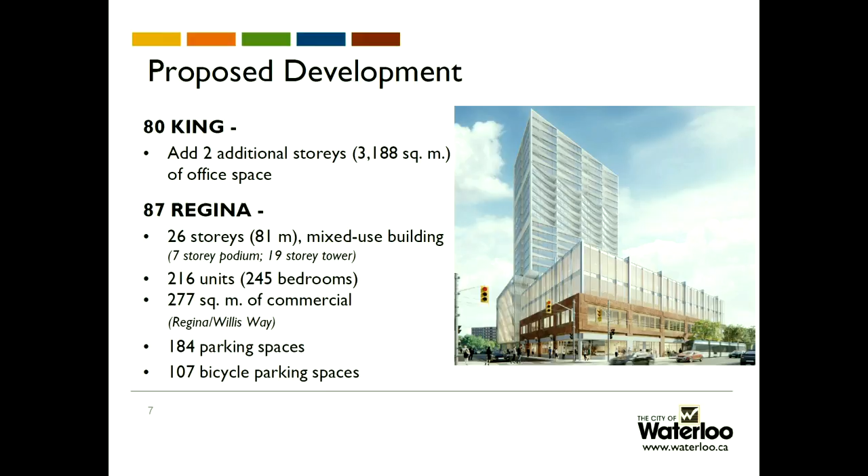In terms of height and density, the proposed height of the development aligns with the height provisions noted on Schedule B1 of the official plan. The building at 80 King Street would be a maximum of 16 meters, consistent with the Main Street designation, and the proposed development at 87 Regina would be a maximum of 81 meters, consistent with the high density designation.

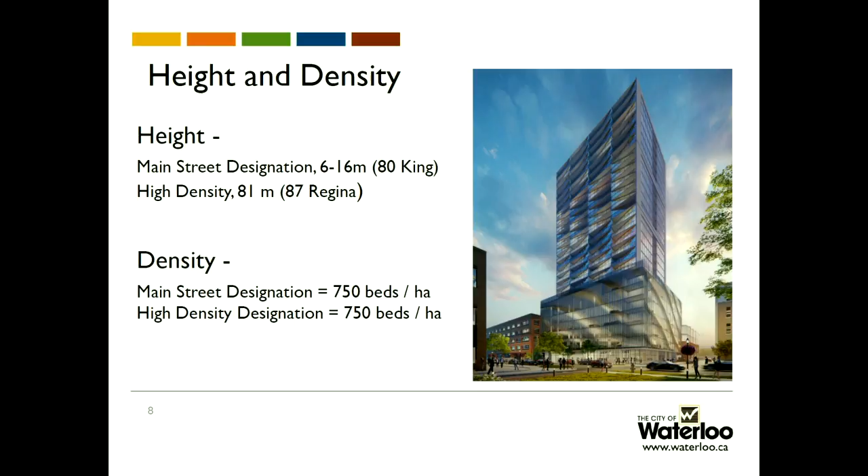The official plan also provides for consideration of sharing density where a property has split designations. Policy 1.4 states that permitted residential densities may be transferred across a land use designation boundary, provided that the property is developed under a single parcel of land under the same ownership, and that all provisions of the individual designation and implementing zoning are met.

The site is different in this regard because there are two properties physically separated by a public laneway, that being Hughes Lane, rather than one single parcel.

Staff reviewed this and are of the opinion that the development does meet the intent of the official plan in this regard, because the lands are held under the same ownership. They do function together and have for some time, with the parking at 87 Regina providing for the tenants of 80 King. They will continue to serve that function in a similar manner with shared parking between the two parcels, and they will be physically connected by an elevated pedestrian bridge.

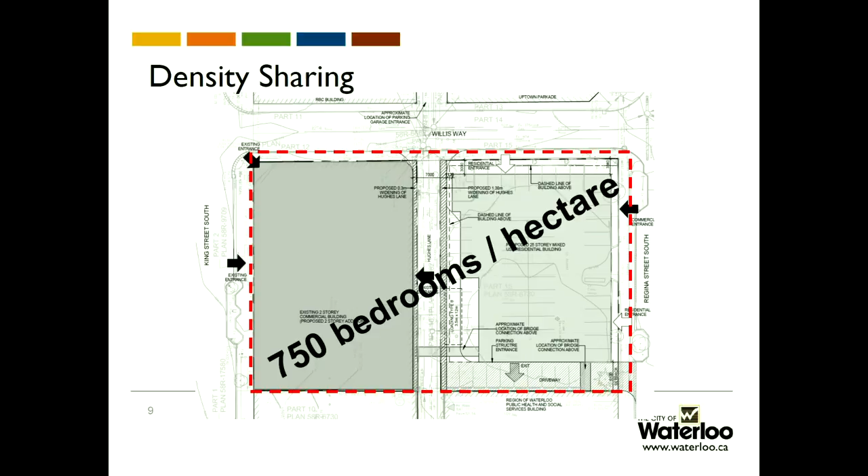However, because the policy framework within the official plan specifically speaks to a shared parcel — that being one parcel — staff determined that an official plan amendment was required to allow for the sharing of density between the two parcels.

In meeting this requirement, the GRCA requires the applicant to provide one being a safe access route, and the other being an emergency plan that would provide for evacuation measures and would address how the residents and occupants would vacate the building and what those protocols would look like.

MTE consultants on behalf of the owner have determined that the nearest point of safe access would be achieved along William Street, immediately west of Hughes Lane, in the vicinity of Marble's restaurant. A safe access route was prepared and submitted for review.

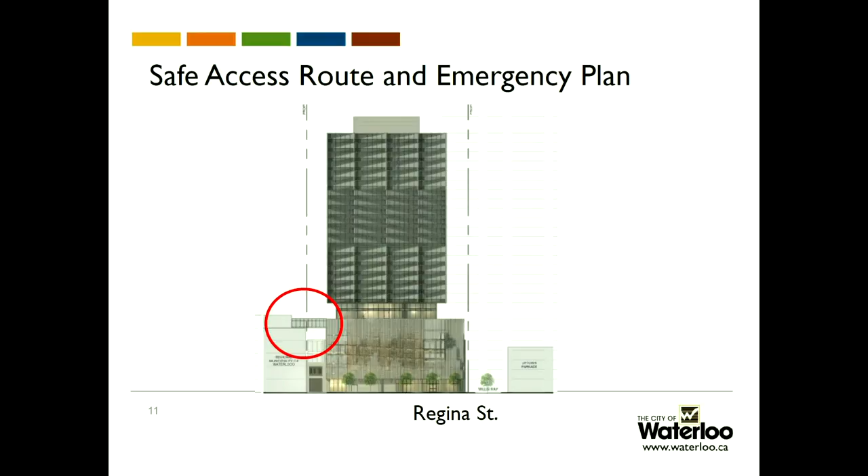In this proposed access, the residents of 87 Regina Street would evacuate the building through an elevated pedestrian bridge that takes them into the Regions building at 99 Regina. They would make their way through interior corridors within that building towards the south end of the property. At that point, a new stairwell would have to be constructed within the landscaped area between Hughes Lane and the Regions parking garage entrance facing onto William Street.

At ground level, the residents would then cross a 1.2 meter wide raised pedestrian walkway across Hughes Lane, and the walkway would continue on to William Street. As part of the access route, Hughes Lane would need to be regraded, and the applicant has demonstrated that turning movements can be maintained with this regrading. However, there may be aspects such as possible tripping hazards that would need to be addressed.

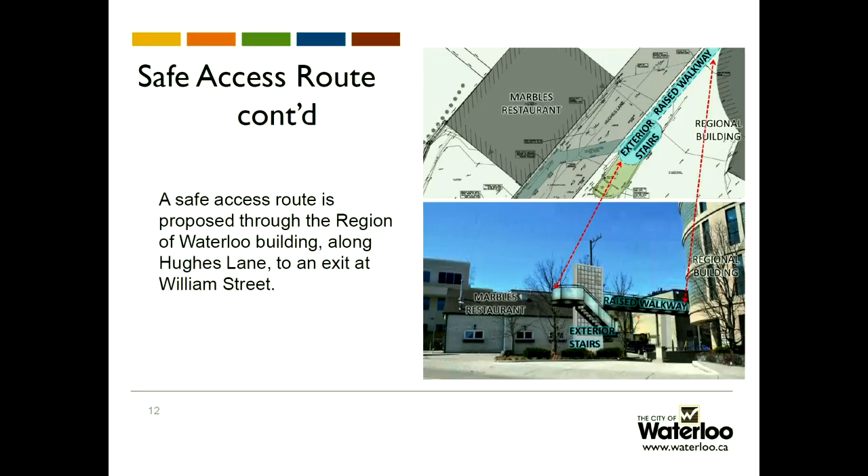Staff are suggesting in this case that a holding provision be applied in the implementing bylaw to address the safe access in greater detail at a detailed design stage. While the applicant has entered into an agreement with the Region of Waterloo to provide for the construction and maintenance of this particular safe access, there still remain a number of outstanding issues.

A substantive issue was identified by the city's Building Standards Division, where two exits are required at all times, including during a flood event, in accordance with the building code, whereas in this case the applicant has only provided one. This is irrespective of the type of land use being proposed. The applicant needs to identify and secure a safe access route in order to provide that construction to the satisfaction of the GRCA as well as the city's Building Standards Division.

There are also a number of technical issues identified in our review, such as the placement of water connections for firefighting, the Siamese connections. Typically where they're placed on the building would be, in this case, under the flood line, so they'd need reconsideration. The location and availability of the building's emergency power supply has to be thought through. Operational designs in terms of the elevators, they'd have to stop at those elevated pedestrian bridges, maintenance of the safe access, and so on.

The third item is that there's an official plan policy that requires development approvals granted on hazardous lands, which these are, that are regulated by the GRCA, to have written permission from the GRCA, and the applicant has not yet secured that from the GRCA.

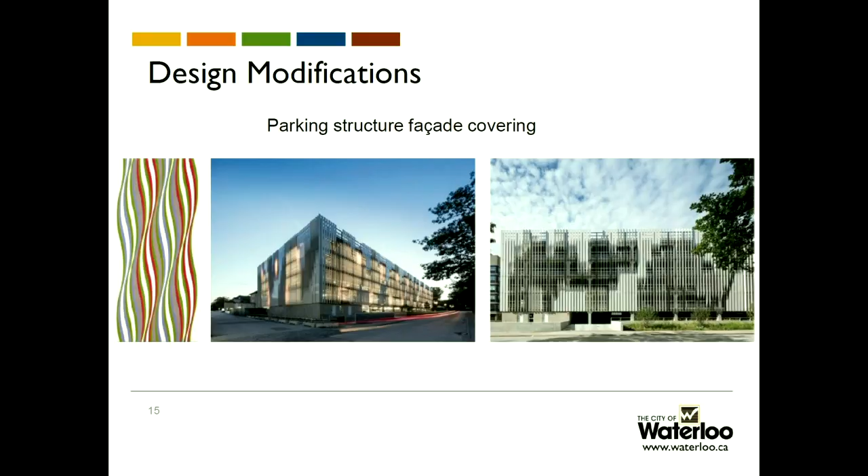That one? Keep going, I know where we are there. I'm almost at the beginning. Oh sorry, you're going the wrong way. Is it that one, or keep going? Keep going, keep going — the one with the pictures. Yeah, keep going, there it is. Okay, where am I here? Well, these are just examples of different facades. Oh okay, so this isn't in Uptown. So this is not, no. Okay, no, okay, because the barriers were worrying me. Yeah, can you talk to me a little bit about — okay, I got it now, I see what you're saying. Excuse me, I'm curious about the pedestrian experience around it and what we've done — need more coffee — what that experience will be for people walking around. That's a high traffic area.

Through you, Mayor Jaworsky, the applicants have provided an activated space at the corner of Regina and Willis Way, with the intention that people are able to be out on the street, whether it's a cafe or a business. The podium itself is meant to mirror or reflect the Regions buildings and the buildings that surround it, without being too overpowering. Between that and wind studies and other elements identified to provide for that enjoyment, it would create a better environment for pedestrians in that area as well.

So it's hard to tell from the, what are they called? The site plans, conceptual site plan. But are there any barriers for people looking into the building or walking past it? If I'm walking up Willis Way towards the public square, what is my experience as a pedestrian? Or is that a better question for...

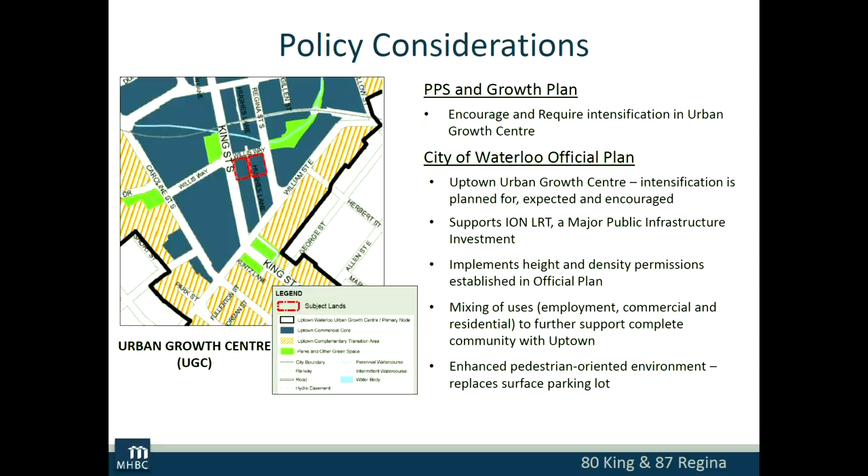This is the best picture, maybe. Through you, Mayor Jaworsky, the entrance for the parking garage will be right here, between the existing regional building and the new building. That side of the building is set back approximately 6 meters from the regional building to allow for a driveway. Folks will go in and then access a ramp and spiral up into the parking structure.

What are your thoughts on hydro line burial, Dan? That's certainly one of the issues we'll be looking at. That ultimately may be the solution to the issue identified by Waterloo North Hydro, regarding the existing above-ground hydro lines. There are a couple of options. It may be that the building can be built without any change to the hydro lines, or if not, one option the developers are considering is whether they'd need to be part of burying those hydro lines. So that's something we're certainly considering, and we'll work through the process with the city.

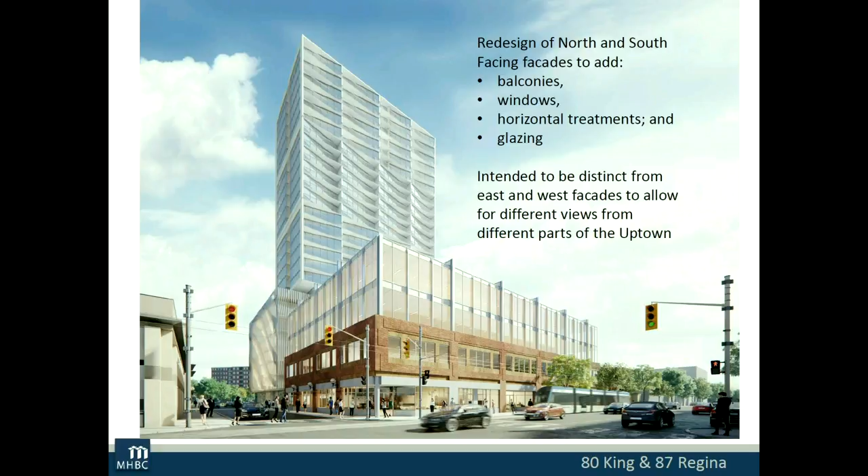Dan, the question I asked Wendy was, what does that 2 extra meters from 14 to 16 meters give you? Through you, Mayor Jaworsky, in summary it gives us the 4th floor on that 80 King Street building. For commercial and office development, the ceiling-to-floor height is more in the order of 4 meters as opposed to residential, which is typically closer to 3. So the 16-meter height limit allows for 2 full commercial floors on top of the existing building. Okay, so that's primarily the difference. Very logical, thank you very much, Dan.

One other comment, if I may. I want to compliment the Torgan Ownership Group - one, for their patience over all those years, and secondly, for having so much faith in Waterloo.

Much appreciated, thank you. I had a couple of questions in your presentation, Dan. You mentioned the region of Waterloo supports the development - what did you actually mean by that? I think you were talking just about the access bridge, correct? I'd say on 2 parts. Certainly the region supports it in the sense that we've done a lot of work with them, and one of the options for safe access is through their building. But also, as part of that, they support the concept of higher density in the urban growth center, which can support the LRT system that's up and coming.

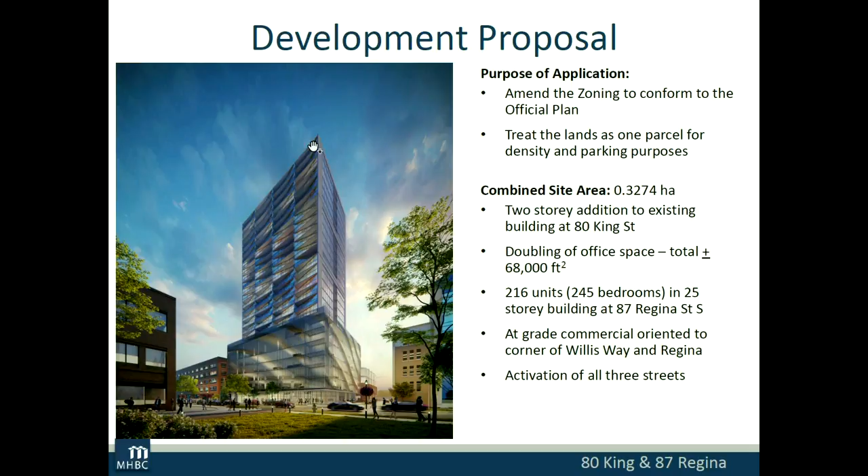And then in the staff report we had here, it mentioned an 81-meter, 26-story building, but in your presentation you said 25-story. Just wondering if there's been a change there. Maybe that's a typo - no, through you... this is actually a question I was going to address in my presentation but forgot. So it's 25 floors. One of the differences - you can see how this looks like it's 6 stories on the parking structure, which was a comment made earlier. It's really only a 5-level parking structure, but because it's a corkscrew design, there's a row of parking on this end, so even though it's 5 and a quarter levels, it ends up resembling 6 stories here. Overall, the height of the building is just less than the 81-meter maximum. Okay, fair enough - I just wondered if something had been clarified there.

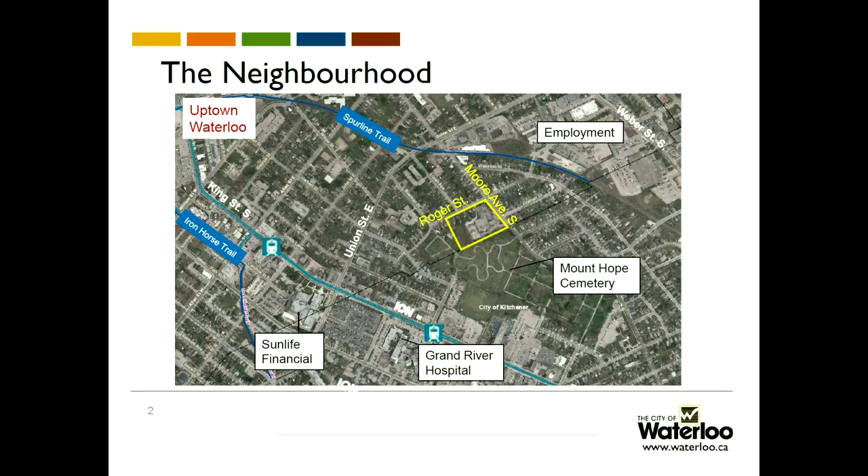There are two trails in the area: the Spurline Trail, with an access point to the north off of Moore Ave, and the Iron Horse Trail, which offers a pedestrian linkage to the west side of Uptown Waterloo and into Waterloo Park. There are bus routes that run along King Street, Union Street and Weber Street, and the Ion, which runs along King Street, with the closest stop at the Grand River Hospital, about 350 meters away.

The lands consist of 8 municipal properties, shown here, collectively approximately 2 hectares in size. The property has about 158 meters of street frontage on Roger Street and about 131 meters of street frontage on Moore.

As you can see by this aerial shot, this is the context of the neighborhood. The surrounding lands predominantly contain single detached dwellings constructed in about the 1940s and 50s, with a few apartment buildings located in the vicinity on Lucan Ave, Union Street, Mary Street, and King Street.

In terms of how the lands currently exist, of the total area, approximately 1.5 hectares is occupied by the Ontario Dye Company, and the remaining lands are used by single detached dwellings and 1 triplex fronting onto Roger Street. There's an informal path that currently exists where the red arrow is at the bottom of the screen, and it leads into the cemetery and provides for access to King Street.

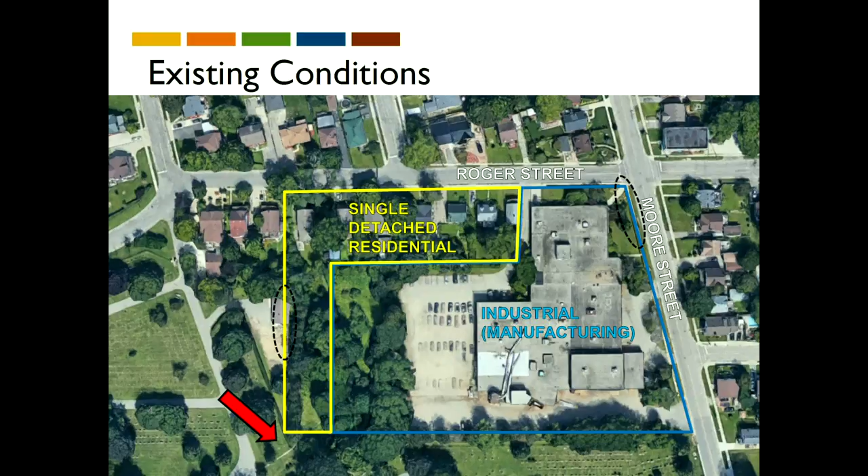The lands generally slope downward from the highest point, close to the northeast corner of the property, which is the dashed circle, to the lowest point, along the westerly property line closer to the southwest corner.

The official plan currently designates these lands as low-density residential on Schedule A and low-density on Schedule B1, which permits a mixture of low-density building forms, including singles and semis, duplexes and triplexes, townhouses, as well as terrace dwellings. The maximum permitted density is 150 bedrooms per hectare, and the maximum height is 10 meters.

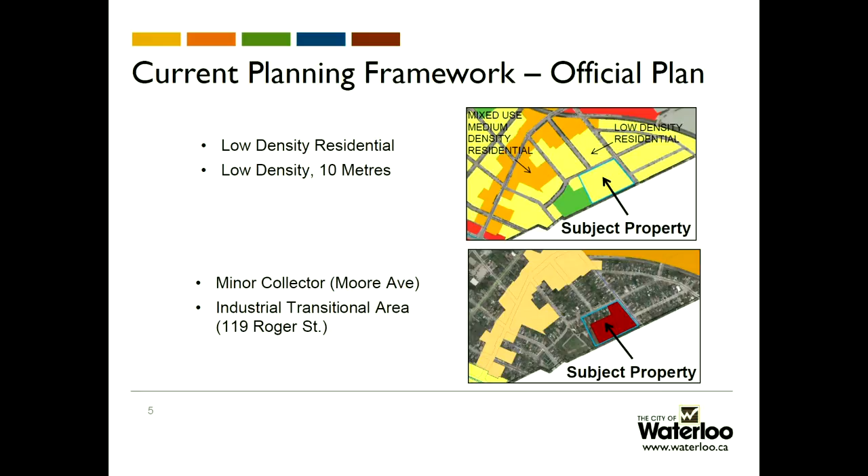Moore Ave is also designated as a minor collector on Schedule B, and 119 Roger Street is designated as an industrial transitional area, and the corresponding policies in the official plan recognize that this area may transition into something else beyond the industrial, more so to residential and higher densities.

In terms of the existing zoning framework, 93 to 111 Roger Street is zoned General Residence 1, which provides for singles, duplexes, and semi-detached dwellings. The maximum permitted height is 10.5 meters, and there is a front yard setback requirement of 7.5 meters where no buildings or structures shall be permitted within that front yard.

119 Roger Street is zoned Industrial 1 for industrial purposes.

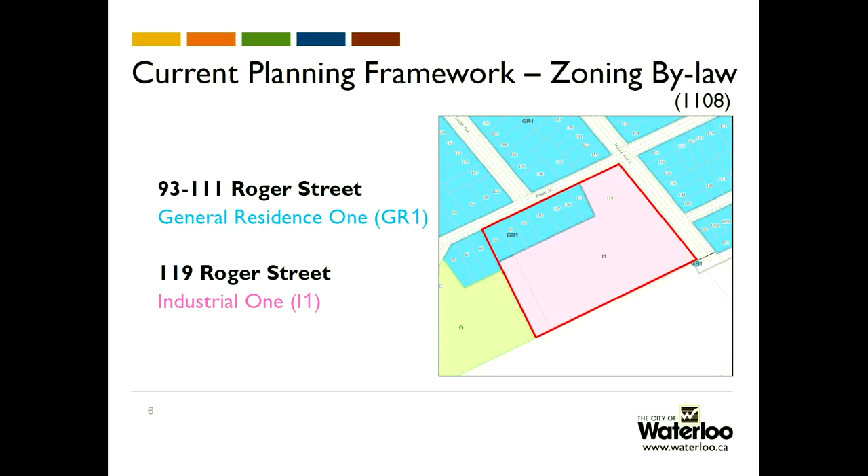The applicant is requesting to amend the official plan in order to redesignate the lands from low-density residential to mixed-use medium-density residential. In considering that, the up-designation will require the provision of community benefits, as well as adding a site-specific provision to recognize a maximum density of 250 bedrooms per hectare, which on this property would equate to approximately 500 bedrooms.

The maximum height for terrace dwellings or stacked townhouses would be 11 meters, and the maximum height for the apartment buildings would be 20 meters.

The applicant is also requesting to amend the zoning by rezoning to holding multiple residence 6, and the holding symbol would require the applicant to complete a record of site condition prior to issuance of any building permit.

The applicant is also proposing through this application to establish some site-specific provisions, including adding terrace dwellings or stacked townhouses as a permitted use, establishing the density of 250 bedrooms per hectare, establishing a maximum height of 11 meters within 35 meters of both Roger Street and Moore Ave, and reducing the parking requirements from 1 space, required in the GR1 zone, to 0.95 spaces per unit.

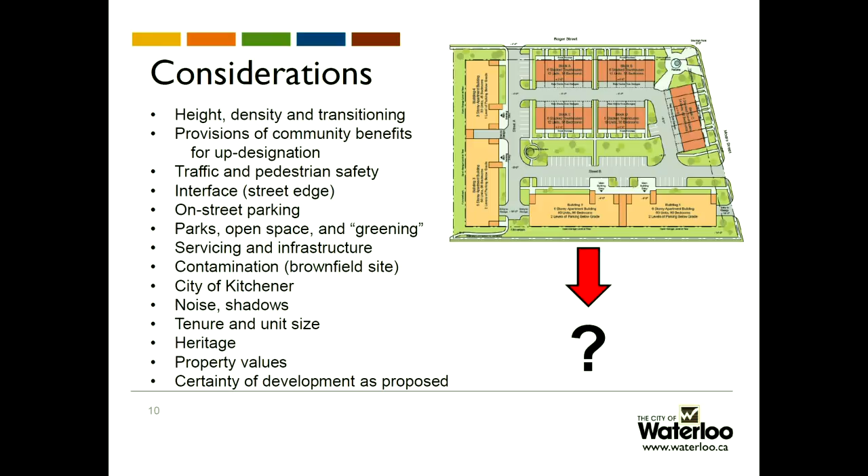There were also noise concerns with respect to more people being brought to the property, as well as from the mechanical equipment associated with the development; whether the units could be sold or rented, and a preference for units containing more bedrooms; the heritage value of the Ontario Dye Company building and the houses on Roger Street; possible impacts on property values; and a concern that there would be a disconnect between the concept plans and the final product constructed.

Two final concept plans were provided by the applicant in May. Both concept plans contain a mix of stacked townhouses as well as apartment buildings. The apartments would again provide that maximum height of 20 meters.

The apartments have been pulled back away from the streets, more toward the westerly property line as well as along the southerly property line. The stacked towns now fully line both Roger Street and Moore Ave, with a maximum height of 11 meters. The driveways were moved to align with the existing road network, and the applicant is providing 8 on-street parking spaces for a portion of the Roger Street frontage.

But there were a few differences between the 2 concepts, namely based on the number of units proposed, the number of parking spaces, as well as the park locations.

Concept A contains 242 units, or approximately 421 bedrooms. That would consist of 168 apartment units and 74 townhouse units. There would be 234 parking spaces, at surface as well as one level under each of the apartment buildings. It also proposes a mid-block park fronting onto Roger Street, which is staff's preferred location.

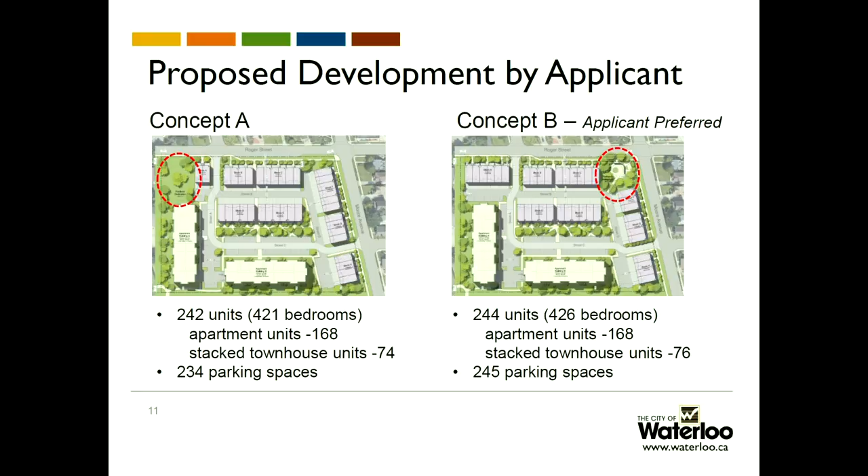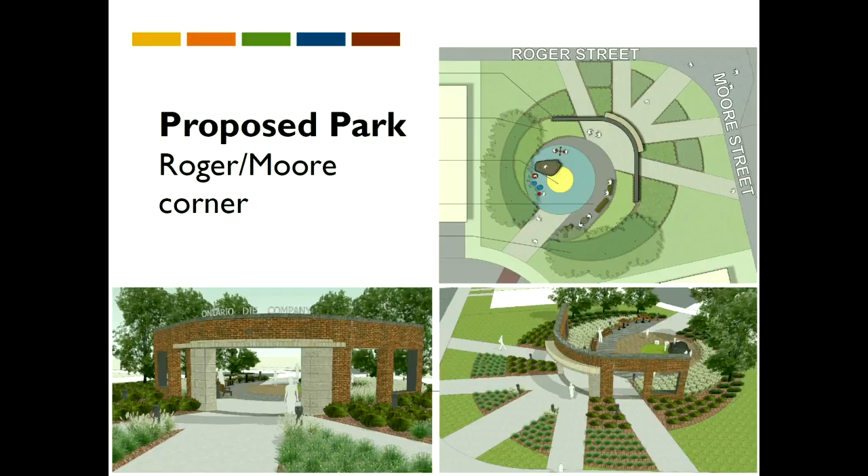These are renderings prepared by the applicant of the proposed corner park. While staff appreciate the design of incorporating the Ontario Die facade or wall, there were a number of practical issues identified by city staff, namely the architectural integrity of the wall, which would be unknown to us if we were to assume the lands, the costs incurred by the city for its long-term maintenance, as well as higher general maintenance costs associated with the elaborate planting and walkways, the clearing of walkways.

While we reviewed these concepts, there were still 2 policy requirements that in our minds hadn't been sufficiently addressed. There is a policy within our official plan that states that when you're considering the up designation, among other things, community benefits need to be provided that will help offset any impacts that might be realized by that increase in density. The other is that the appropriate height and density transitioning at the interface where the existing neighborhood meets up with the proposed development. These 2 policy considerations affect the parkland and the setbacks.

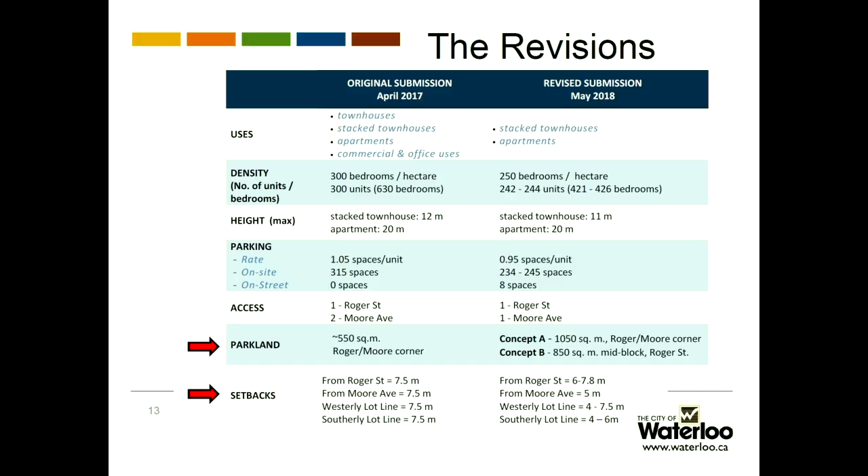In response to these outstanding matters, staff is proposing a 3rd concept, or Concept C. It consists of a park that's mid-block, located on Roger Street, approximately 27 by 39 meters, as well as a 500 square meter amenity area at the corner of Roger Street and Moore Ave, again to include a portion of the ODC facade. The setbacks along Roger Street are larger than what's proposed by the applicant, and we've added an additional landscape buffer. The projections and encroachments have been decreased by comparison to what has been offered by the applicant.

In staff's mind, the benefits of that mid-block park are that it provides safer access for younger children, away from that busier intersection. You've got an area that would provide a large opportunity for programming. It creates an opportunity for the city to establish a north-south pedestrian connection through to the southwest corner. It also provides a physical separation between the existing dwellings on Roger Street and the new stacked townhouses or block that's closest, and effectively reduces the massing of those blocks as you move from west to east. You can see you've got a block of 2, then a block of 4, then a block of 6, providing that better transition.

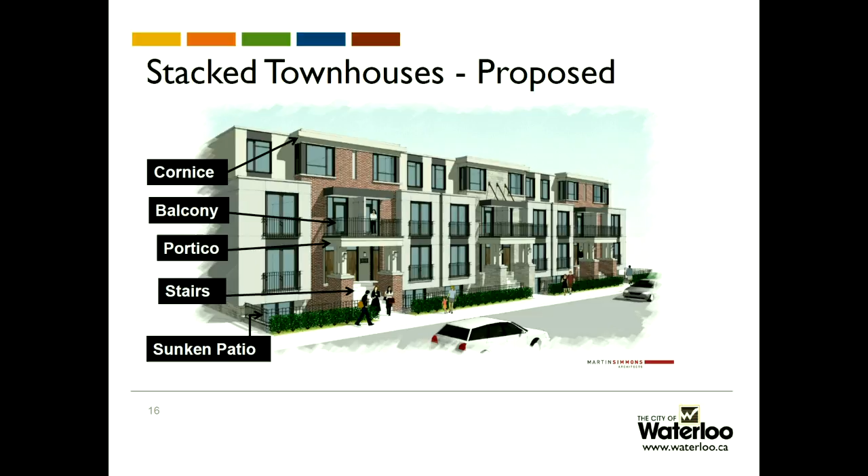And although not identified, we'd also be expecting the stairs to encroach into that front yard as well.

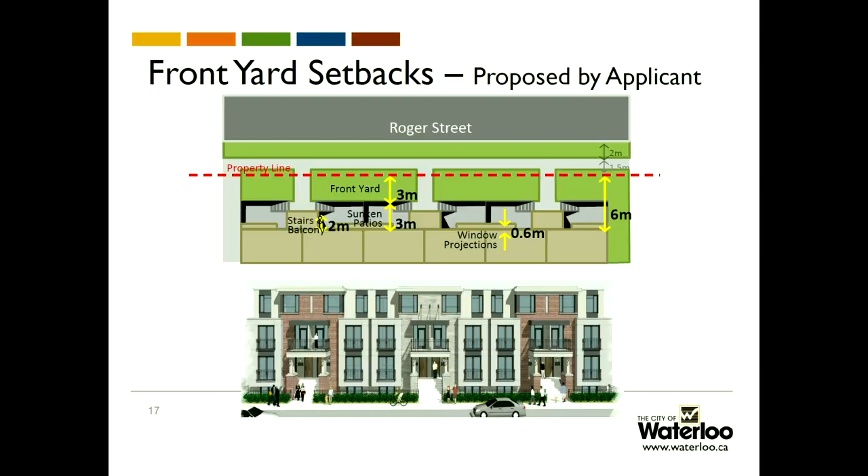This slide illustrates the collective results of those encroachments and projections on a chunk of Roger Street that I've used to illustrate this. The sunken patios would extend into the front yard by 3 meters, leaving only a grassy front yard of 3 meters. In staff's opinion, this streetscape is very limiting in terms of the tree species that can be planted within that 3 meter buffer, and it also reduces the usable area for the front yard, which is not really in keeping with the neighborhood, which has that 7.5 meter setback.

In comparison, staff are recommending a 7 meter street line setback from Roger Street that would include a 5-meter buffer, as shown here. There would be no projections permitted within that landscape buffer.

The sunken patios would be reduced from 3 meters down to 2 meters. Although we are recommending a 2-meter sunken patio, there is the ability for the developer to continue maintaining that 3-meter sunken patio. It would just mean that the units fronting onto Roger Street would have to be pulled back by an additional meter.

The overall intent of all these regulations is really to create a streetscape that more closely aligns with the neighborhood and provides for a larger area for tree growth, as well as a small private area for the owners to have and use.

Similarly, staff recognize the fact that Moore Ave is a different road than Roger Street. It does have a larger right-of-way and boulevards. On that basis, we are supportive of the applicant's request for a 5-meter street line with a 3-meter landscape buffer.

In terms of staff recommendations, we are proposing to support a maximum density of 250 bedrooms per hectare, and a minimum of 50% of those units to contain at least 2 bedrooms. Terrace and townhouse dwellings are to be permitted. We have added the townhouse dwellings just to provide greater flexibility within the zoning.

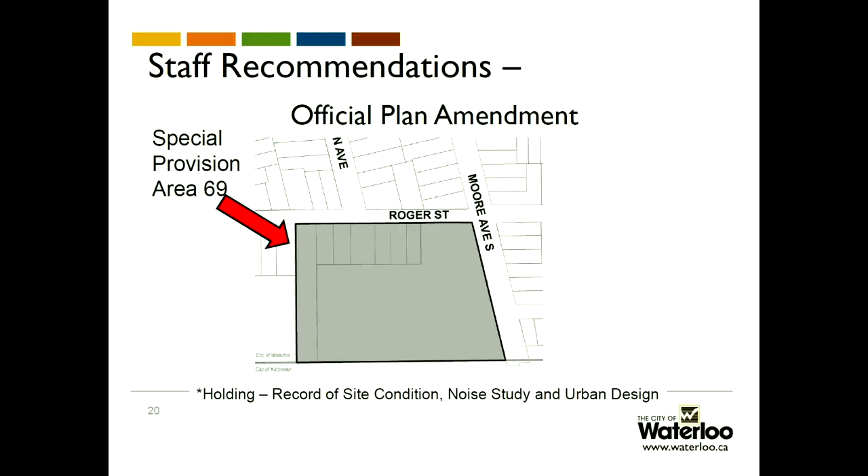As well, we'd be proposing to create a special provision area. The holding provisions within that special provision area would be applied for a record of site condition, as well as a detailed noise study, and demonstrating that the proposed development is consistent with the city's urban design guidelines and site-specific directives contained within the staff report.

In terms of the recommended zoning provisions, we'd be looking at setbacks from Roger Street of 7 meters, from Moore of 5 meters, a southerly lot line of 6 meters with exception to 35 meters of Moore Ave, which we'd be looking at 5 meters, a westerly lot line of 7.5 meters, and from any areas zoned Green 2, we'd be looking at a...

1.8 meter setback and a 5 meter setback from the apartment building. And then from any private roads, again, a 1.8 meter setback. The landscape buffer is 5 meters along Roger Street, 3 meters along Moore Ave.

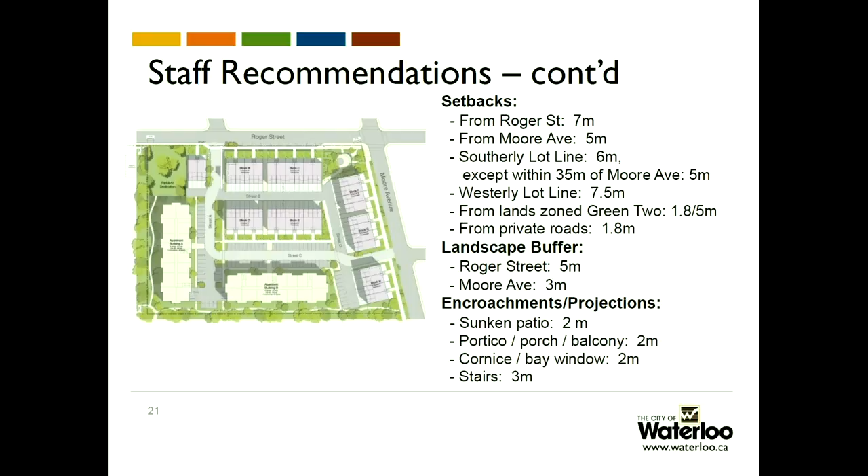And then, again, the encroachments were ranging 2 meters for the sunken patios and porticos and cornice or bay windows, and then 3 meters for the stairs. In terms of parking, we are proposing the residential rate of 0.85 spaces per dwelling unit with the additional 0.1 spaces per dwelling unit for visitors and 0.6 spaces per dwelling unit for bicycles.

In closing, I'd like to just thank the residents who did participate on the neighborhood working group. They did provide their time and very thoughtful comments, which were very much appreciated through the review of the plans and reports. Thank you.

That little park where the signage will go, the manufacturing Ontario Die area, so that will be a public area, so the public are allowed to use it, but it's maintained and owned by the developer, correct? Through you, Mayor Jaworsky, yes, we would be proposing that it would be publicly accessible, so the public would be able to use the space, but it would be privately owned.

So the private owner would be in charge of maintenance? Correct. Okay. And because of the nature of that land, where what it was, who will be paying for any site cleanup that probably would have to be done? Would that be citizens or the developer? In terms of site cleanup, do you mean the use of the land and all that? From a contamination perspective, yes.

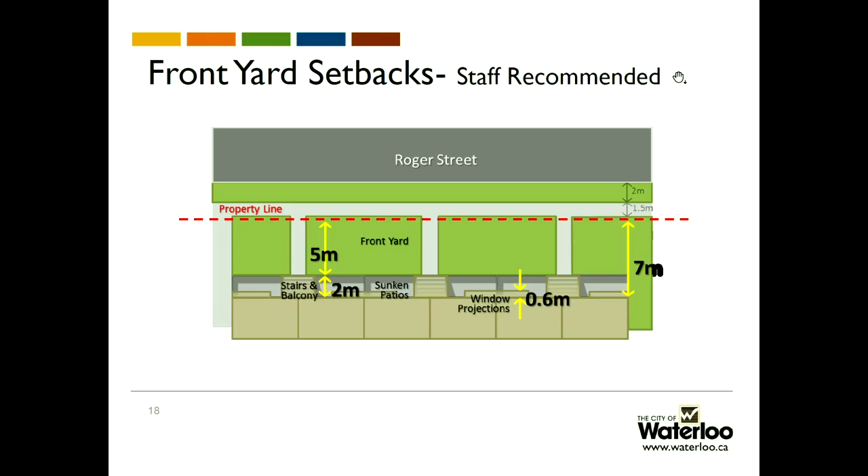Okay. And another concern that had come up from neighbors was, this is a very family-oriented area, it's 8 to 80s in that neighborhood, and the idea that whoever's moving in here, they'd like to see some families. So there was the idea that there should be larger 3-bedroom, 2-bedroom, 1-bedroom units, but skewing to the 3-bedroom, and that's what it looks like in the report. So can you tell me a little more about that?

Through you, Mayor Jaworsky, yes, there is the requirement we're proposing as part of the site-specific zoning regulations that at least 50% of the units contain at least 2 bedrooms or more. Within any of the concepts proposed, there are a number of 1, 2, and 3 bedrooms. The 1 and 2 bedrooms are primarily in the apartment buildings, and the 2 and 3 bedrooms are in the townhouses. So each of the stacked townhouses, the bottom unit will be a 2-bedroom, and the top unit will be a 3-bedroom, so you're getting about 34 3-bedrooms and 34 2-bedrooms in the stacked towns.

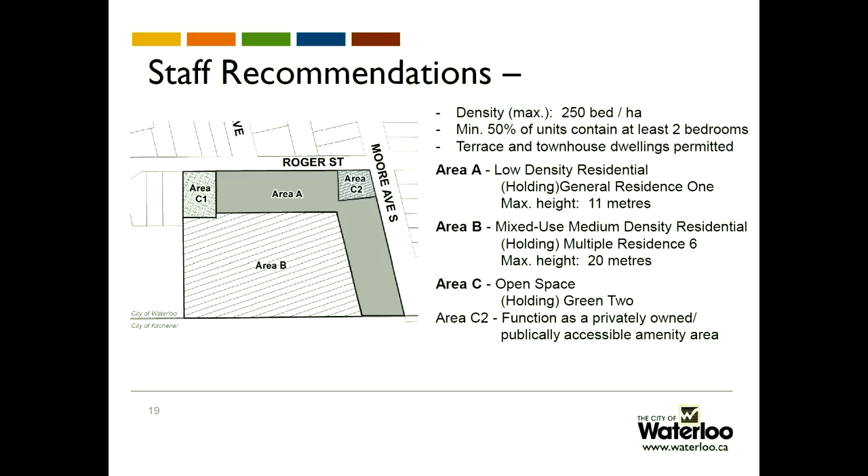You talked a bit about the Roger Street setback issue. Is anything predominantly different on Moore, like with the walkout patios and things like that? Is there an issue on Moore Street? We talked a lot about Roger, but I don't remember a lot about Moore and setbacks there.

To you, Mayor Jaworsky: we do make a distinction between the different roads of Roger Street and Moore. Roger is an undersized right-of-way comparatively to Moore. Moore is a minor collector, intended to move traffic through neighborhoods. Because it's a wider right-of-way, it has boulevards—you see the sidewalks, and then on the other side of the sidewalk is that boulevard, providing greater separation and opportunities for tree plantings. So for those reasons, we see it as a different streetscape than Roger Street.

Gotcha, okay, thank you. Further questions of staff? Seeing none, thank you, Wendy.

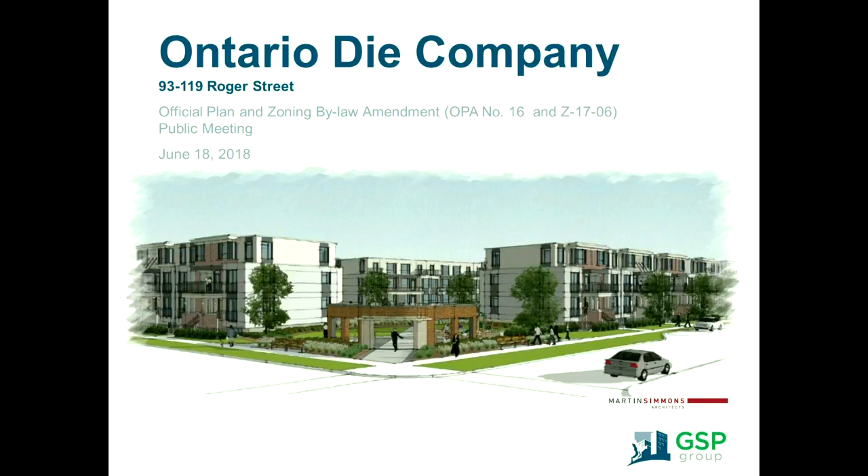So we're here tonight to support the staff recommendations to redesignate and rezone the site. However, we're going to ask for your consideration on a couple of matters, specifically the park and a couple of setbacks, as we move through the presentation. We have graphics and plans that have been updated over the past couple of days, so they are different than what is in the staff presentation. If you'll indulge me for 10 minutes, we'll walk through that and review it.

Certainly, as Wendy indicated, we started this process over a year ago, and the ODC site is certainly unique—an industrial operation in a residential neighborhood dating back to the 1940s. It's been there all those years, and now it's time. ODC is moving to a new facility in the north end of Waterloo, and it's time for this site to transition to a residential use.

We had the informal public meeting here in these chambers, followed up, as Wendy indicated, by a neighborhood meeting that was well attended in August. We had a number of working group meetings and ongoing discussions with city staff. Because we're on the border with the City of Kitchener, we also had discussions with Kitchener staff, and they reviewed all the technical reports. So there's certainly been a lot of discussion and work that has gone into the project.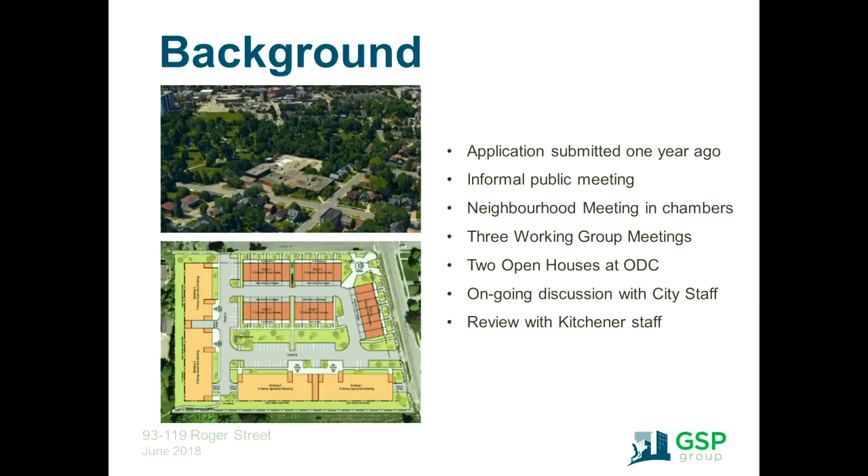I echo Wendy's sentiment that we had some good sessions with the neighborhood—maybe didn't agree on everything, but we worked through it, discussed all the items, and at the end of the day we've ended up with a different plan and a better plan. Those revisions I won't go over in length—Wendy has covered them off—but you can see the major ones.

One of the big ones: in the original concept we submitted, we had apartments, the end of which went out to Moore, and here, even though this was only a 3-story apartment, the end went all the way out to Roger Street as well. That's one of the big changes in the plan now—the stacked townhouse units fronting all the way around on Moore and Roger Street, with the apartment buildings set back behind. The overall density has gone down from 300 to 250 bedrooms per hectare.

We've looked at widening the street, as Wendy indicated. Along through here, Roger will be widened, providing the opportunity for new sidewalk and on-street parking. We proposed to widen it along here as well, but the neighbors said they'd like to keep it the way it is and keep some of the trees, so we removed that, and we also removed a proposed widening on Moore.

So the townhouses have decreased in height as well. We had originally asked for 12 meters in height, we're now at 11 meters.

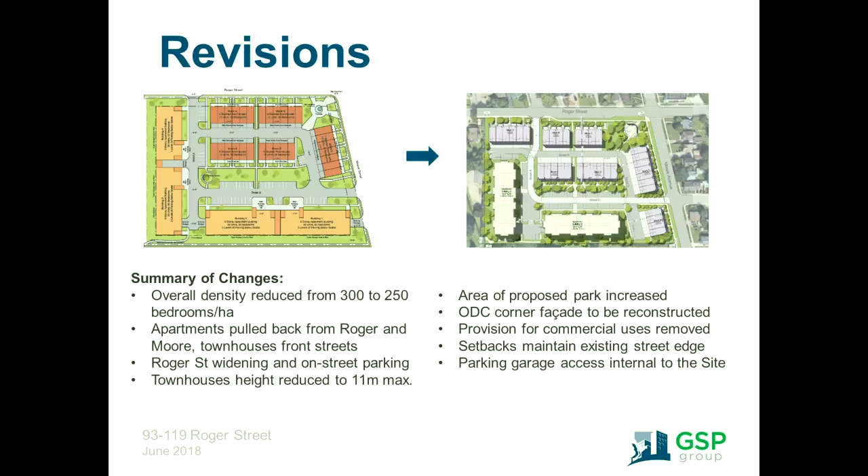The technical studies have also been reviewed by city staff, and so the site is serviceable. The traffic studies have been submitted and reviewed by city staff here and the city of Kitchener as well, since Moore goes across the boundary, and those studies have been reviewed and concurred by the traffic department staff. So from that perspective, we've got a site that is certainly workable.

And this is our current concept plan that we've worked through of late. I think the big thing to note is again the setbacks along Moore and Roger Street, and then also the park at the corner.

So when we originally started, if I go back to that previous plan, we had a park area of about 500 square meters or so. Those two plans, A and B, that we submitted back a month and a half ago, had a park of about 850 square meters. This plan has a park area of about 1,200 square meters, plus or minus, and that's equivalent to the parkland dedication contribution for a project of this scale.

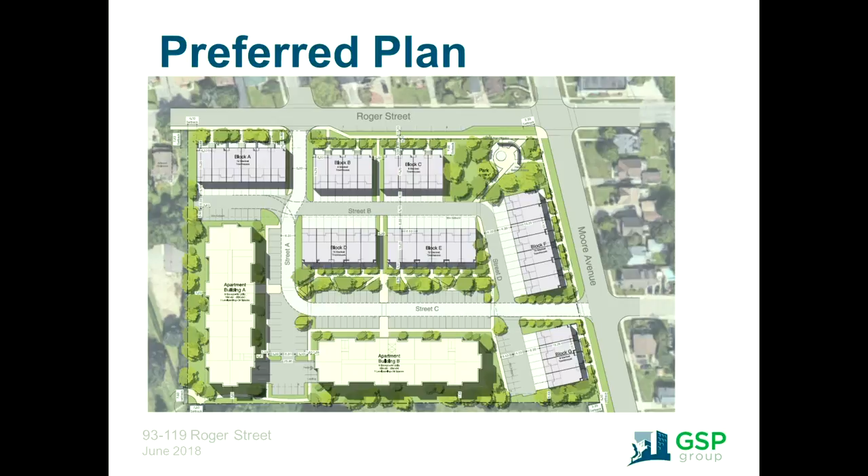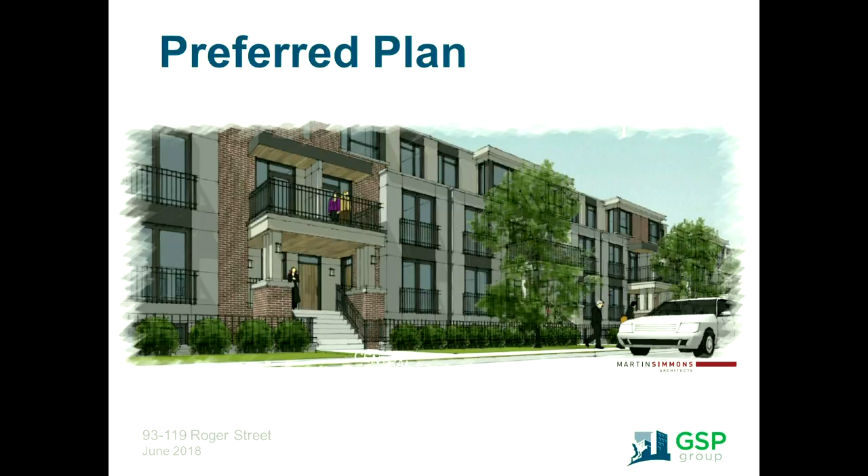Having Reed's involved, they've engaged Martin Simmons Architect to work on their behalf to look at the stacked townhouse units and the apartment units back behind. As you can see, the building elevations are really progressing well - it's a very nice brownstone kind of feel, a very contemporary yet traditional feel.

Emphasis has been placed on not only coming up with a really attractive streetscape, but taking the mass of the building and working through vertical and horizontal projections and bays, and stepping at the top to break up that building mass, to create a very attractive and urban streetscape for the Midtown area.

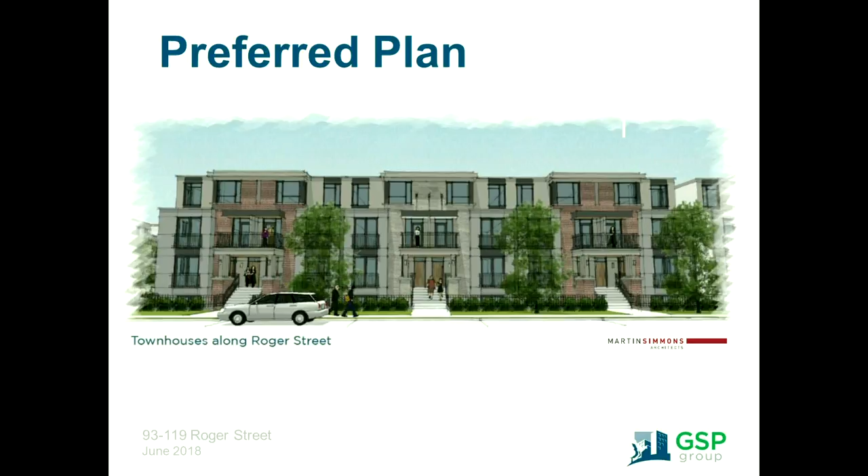So in terms of providing that park or community space, as Wendy's proposal before you in the PowerPoint had the three options - we originally started again at the corner, and staff asked us to look at this option, option A. What would that look like with a park down at the corner? It would be about 1,000 meters or so, a little under what the parkland contribution would be.

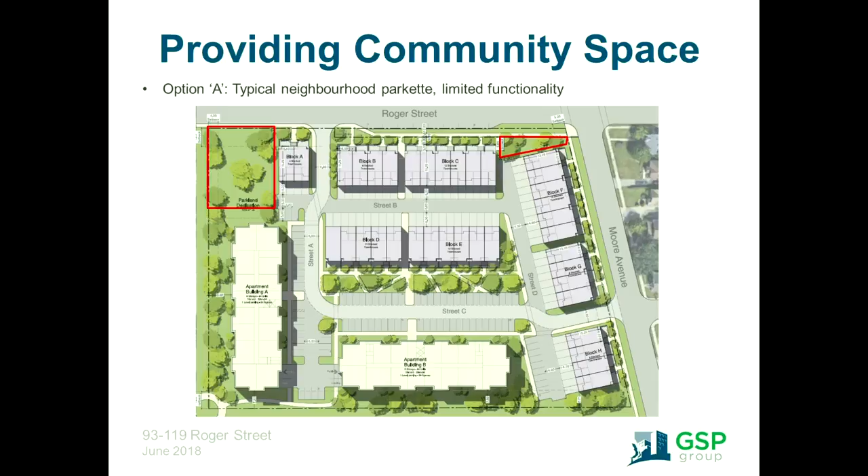It is somewhat constrained, and it does have an overlook from the end of the apartment building there. We're working through the grading on the site right now, but haven't got final grades - the site does fall away as you go from Roger Street back into the site, so it's not ideal from that perspective, but it could certainly be a park option. At the corner, you're left with a very limited amount of space in that option.

Option C was, again, the combination - staff's proposal was to create something in the order of about 500 square meters at the corner, and then the same amount of public park space over on the northwest side. That has the largest amount of space, and certainly it's above and beyond what the parkland dedication would be. In our opinion it's also the least efficient, because you're spreading your efforts between two pieces of property, and if we save the building facade, it gets a little squeezed in that space as well.

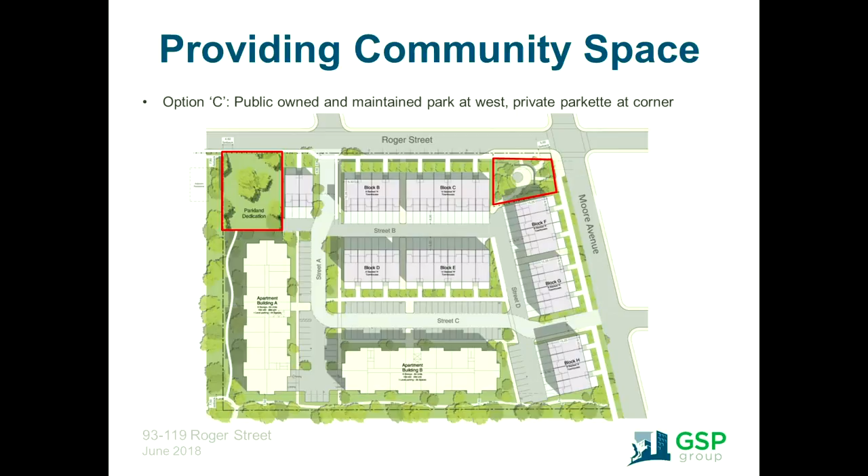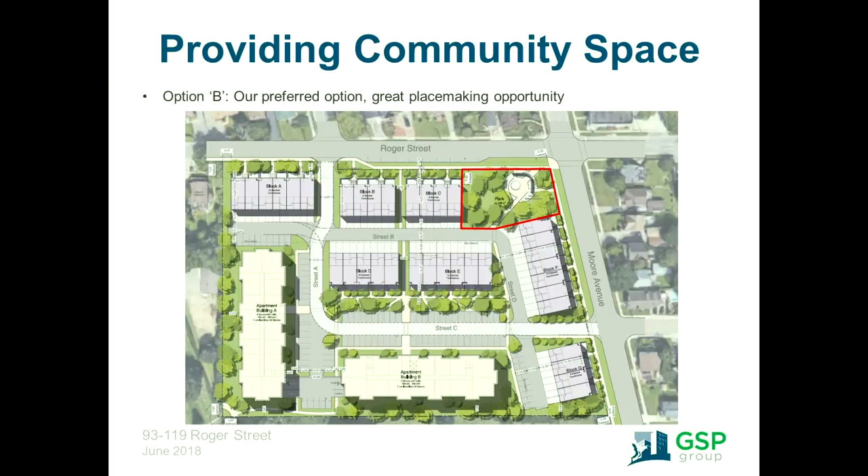So this plan was recently created, and we're looking at enlarging that corner park so that it's about 1,200 square meters in size, combining those two park or public spaces into one that's bigger and, in our opinion, most efficient and effective. We've got about 1,200 meters up from 800 meters, and this is going to be the flattest part of the site along those two streets at the corner, so that gives us the greatest flexibility. We can take the ODC facade and reconstruct that at the corner.

But I think our biggest point here is that we've got enough space that we can create a wonderful multifunctional public space. We've got enough land here that we could do play areas and equipment for kids, sitting areas both back in as well as along the street, gardens, and some hard court areas or small plaza spaces. So we've got a great opportunity here to create something that'll be a real focal point for the community, something that'll be attractive, as Councillor Laurel said, for people 8 to 80 years old.

And what we're proposing to do is create a privately owned, privately constructed, and privately maintained space here, but with public accessibility. So there'd be an easement placed over top of it that would give the public access to this. And that's an approach that the city has used recently, I understand, in the Carriage Crossing neighborhood, where the parks there have been developed on a private basis.

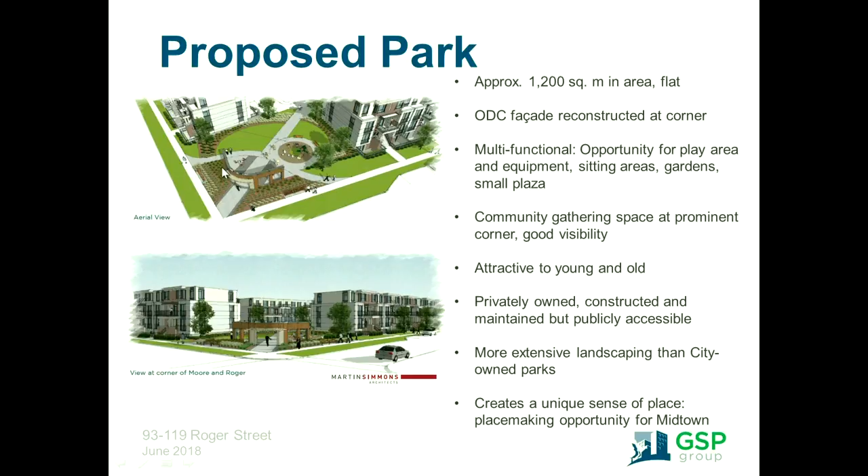We recently had an open house at the ODC offices last week, and there was certainly some support shown by those who left comments for the park. And I think the thing that people liked again was the centrality and the multifunctional nature of what we can do here on this important corner.

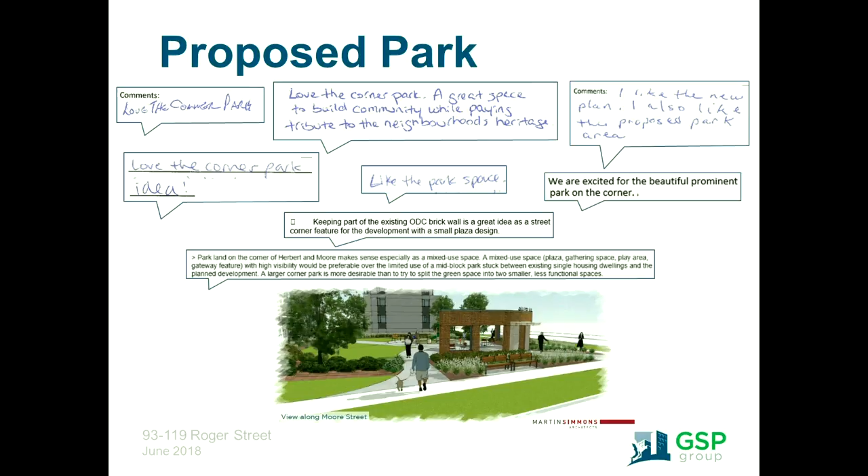And I think the opportunities again, we can do hard court areas, we can throw up a basketball net, areas that can be programmed for other neighborhood functions and festivals and markets and those kind of things. We've got room for kids' play areas, some open lawn area. We can design it so that it can be seasonal as well, maybe look at a rink. We haven't got to that level of detail yet, but those are all possible things that we could do here.

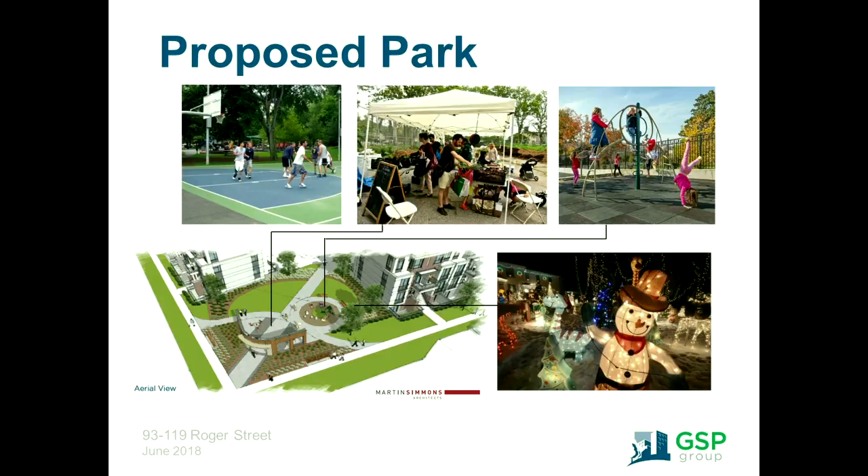In terms of the proposed regulations, we submitted a letter on Friday. We asked for a series of setback adjustments, but we've had some further discussions with staff, and this is going to be an iterative process, perhaps not dissimilar from the previous application you had, where as we go through this process, we're going to have more information and deal with some of the technical issues like grading.

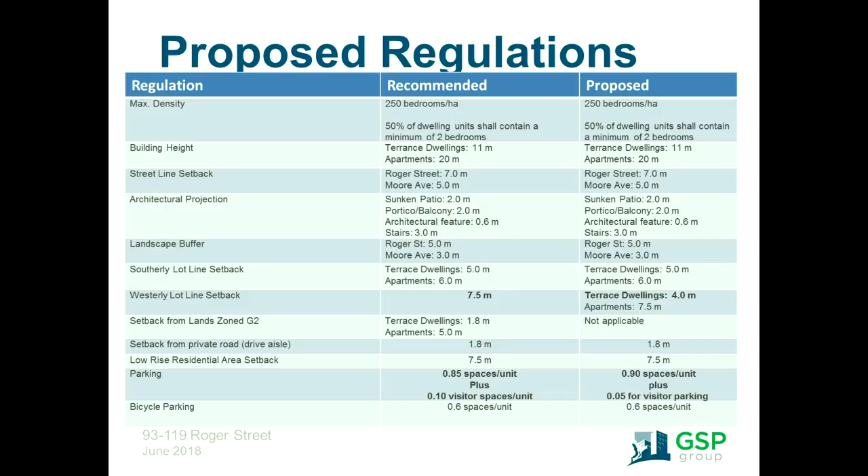So what we are certainly prepared to work with right now are the regulations that are recommended before you. And as we get into the detailed design, I think we have an understanding that if there's some good rationale for making some small adjustments, instead of 2 meters, we may need 2.4. We can work through with staff and make those adjustments as we go forward. So there's really just a slight adjustment to the parking regulation that we want to work with right now.

In terms of streetscapes, we are proposing a 7-meter setback, whether the planting area is 5 meters as recommended or we adjust it a bit. We certainly do have enough planting area to create a very attractive street edge here and have room for some hedge planting along by the courtyards and for some good street tree planting along Roger Street as well.

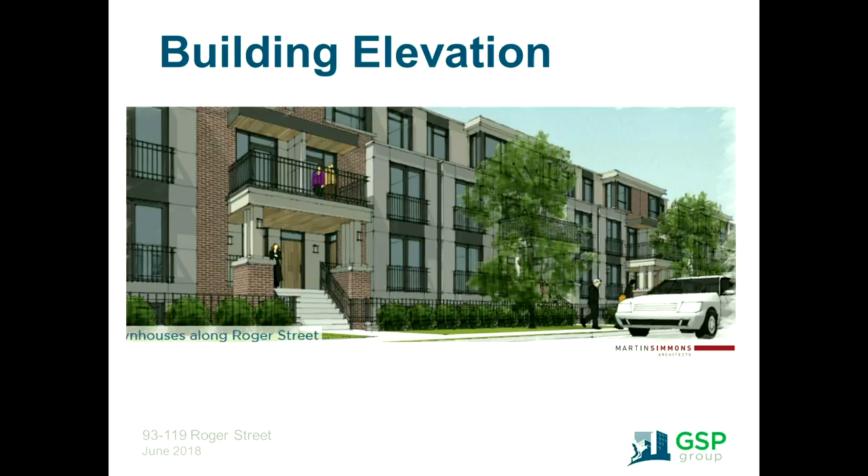The buildings, I think, are really starting to evolve, and in conjunction with that green forecourt and the street tree planting, I think we'll have a very attractive edge to the community. The building, as we've requested, is 11 meters in height, and we think that scale is appropriate and works in the neighborhood. Given the setbacks proposed from the street and on the opposite side, there's quite a separation between units across the street, and we have an appropriate scale that works.

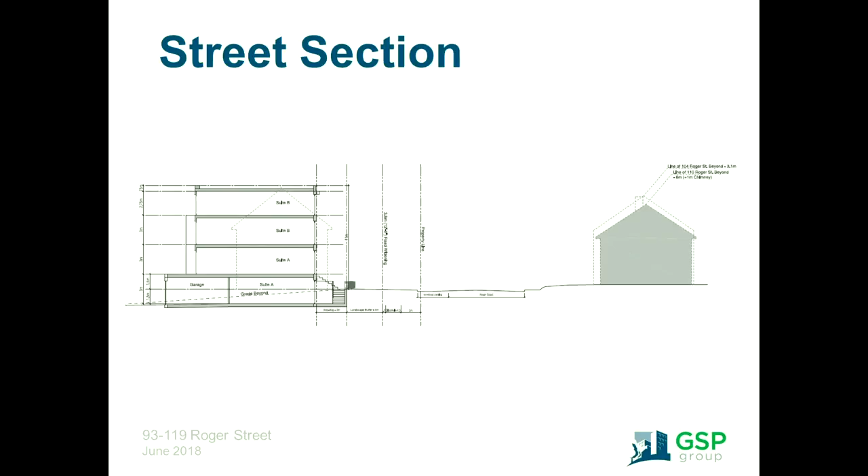Keeping in mind the current official plan policies and zoning regulations on the site do permit buildings up to 10.5 meters in height, so our increase in building height is modest. The apartment buildings as well are at the back. They'll be subject to more detailed design, but the intent is to come up with a building elevation that fits into the community in terms of materiality and design.

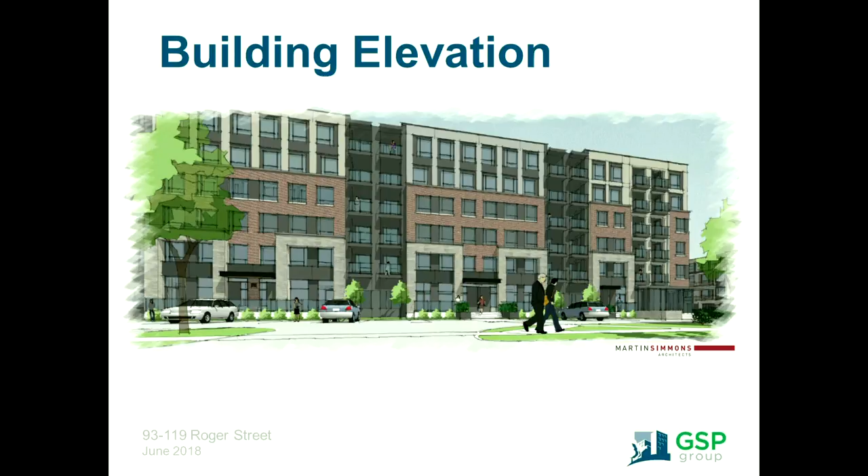In terms of conclusions, this is certainly a unique site, and a unique opportunity for an infill development that is quite close to the LRT station, about 350 meters away. We think this is an appropriate and sensitive redevelopment of a brownfield site. We can provide a range of housing on site, and as was mentioned through the questioning, there will be a significant number of 2- and 3-bedroom units because of the stacked townhouse form.

It was interesting last week at the open house to see a number of seniors come through, asking about the site, the type of units, the size, and when they'd be started. It was clear from talking to them that they were looking for alternatives to their house in the neighborhood. They like the neighborhood and are looking for an opportunity to stay there, downsize, and move into smaller units. So those opportunities would be there as well.

But I think a really unique community benefit here is the provision of family-oriented housing in a central neighborhood, close to uptown, close to downtown Kitchener, and close to the LRT system. If you recall the informal meeting we had a year ago, Professor Don Parker from the University of Waterloo talked about that missing middle in the housing market, and I think there's an opportunity to address that kind of housing here.

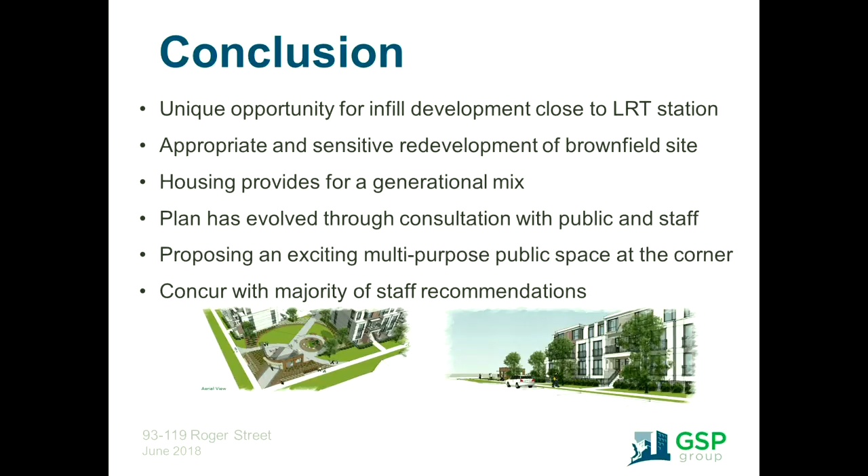So there are these two options for the park system. Our preference is for option B with the parameters that we indicated, and we think that fits with this site and with the unique opportunity that we've got here in this Midtown neighborhood.

In terms of zoning regulations, there was a westerly side yard setback, over in this location here. We were asking for a 4 meter setback, which in conjunction with the existing setback on this property, we think would be a reasonable solution. We've had some further discussions with staff, and if the park goes in the corner location, they'd be looking for a little additional space there, and we're amenable to changing that from 4 meters to 5 meters.

The parking rate is similar to what was suggested by staff or supportable by staff, at 0.95 per unit. We just wanted the amount of visitor space changed so that it's a smaller amount, oriented to the apartment units. Each of these townhouses have a rear garage - that's something I forgot to mention. There will be a rear lane, with a garage and driveway at the back for each of these units. So we're able to take care of the individual townhouse parking back here and create a wonderful streetscape because we don't have to worry about garages and driveways at the front end.

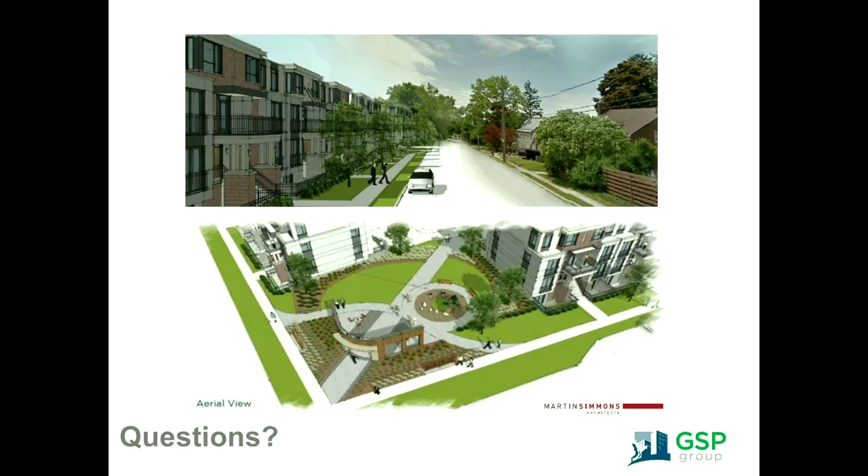But I do like your little clock a lot better than Kitchener's. The Kitchener one is very big, and it's in your face. No, thank you, Glenn. We do have some questions already. Councillor Durrell and Councillor Vieth.

Thank you, Mayor Jaworsky, through you. Thank you, Glenn, for this report. Let's start with this: our staff are recommending something that is not what you're interested in at this point. So what happens if as a council we agree with our staff and not you? What does that mean for this proposal? Well, it means we'll have to sit down and work through that option. If that's the option council prefers, then we'll have to make the best of that. We think this is just a really unique opportunity, and at the end of the day, I think there's more to be gained by doing the corner park.

Okay, and you had brought up traffic, so I'm just going to check my math. At 160 trips over approximately 4 hours, 2 hours in the morning peak and 2 hours in the afternoon peak, we're looking at about 1 extra car a minute. Am I getting this right? I have not got the traffic report with me, I apologize, so I'll take your numbers—if it is 80 over a peak hour, then it would be just over a trip per minute. Okay, so 1 extra car a minute during those 2 peak periods is essentially what we're coming to.

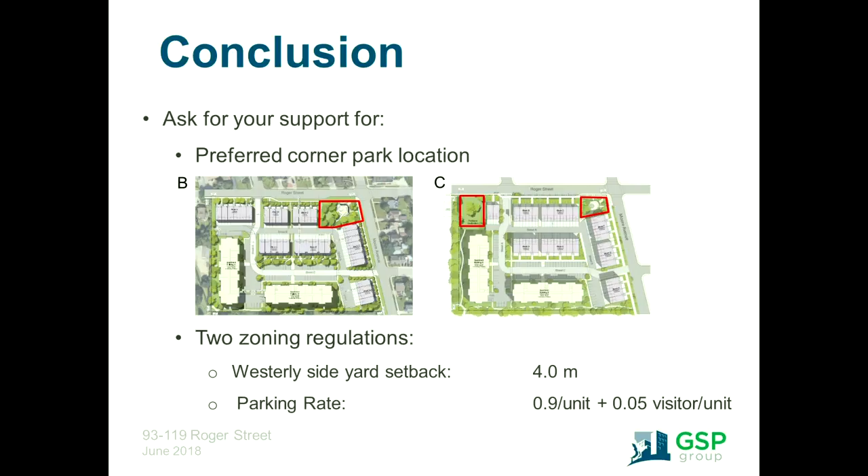So you're losing one less unit with your preferred option. I believe it'll be two because they're stacked units, right? So they're one on top of the other. Oh, okay. Yeah, one module here is 2 units. Yeah, yeah, this makes sense.

Councillor Whaley. It's a question for staff, Mayor. Okay, and any further questions, delegates? Councillor Henry.

So you've talked about the different park options, and given that's the significant point of disagreement between the applicant's planners, yourselves, and staff planners, I think that's useful to spend some time on. From what I heard, your combined park is on the order of about 1,200 square meters. From what I recall of Wendy's presentation, we had sort of about 1,000 square meters. That was about 170, 200 meters deficient.

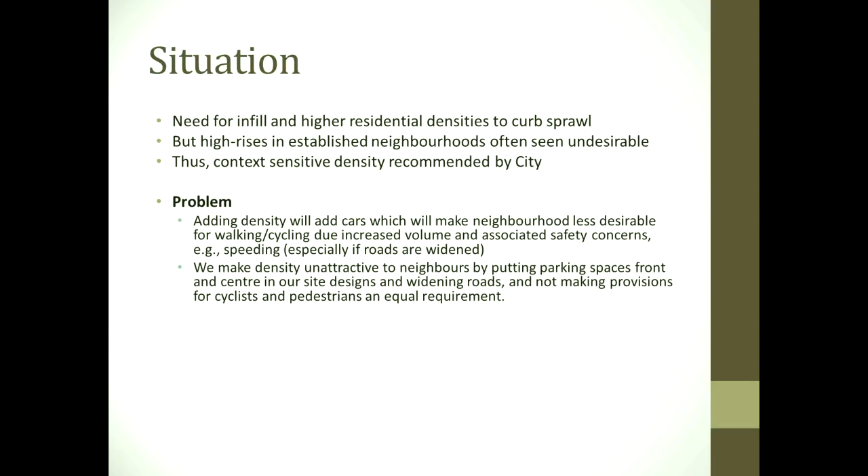So I want to ask these questions and say, well, there's not just these problems, there's solutions. We know how to deal with this. This is not new. Lots of cities, and we've even done it in places in Waterloo. We can make upgrades to infrastructure nearby to encourage cycling and walking. We can think about traffic calming, and we can think about site design that actually creates the kind of density people will enjoy living in, as opposed to just wanting to get in their car and drive away from it.

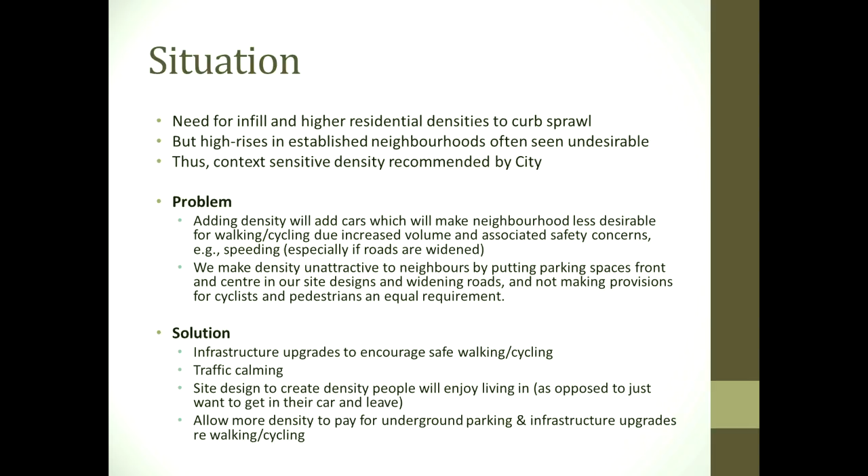We could even allow a bit more density on the site than what is currently being proposed by the developer and the city, and thus help pay for more underground parking and infrastructure upgrades in the surrounding area. Here's one of the proposals we've seen.

I would argue one could add another apartment building in there, but actually turn the in-between spaces into green space if parking was moved underground, allowing residents to actually step outside. Replace the tunnel vision of this development with the facades you just saw from the developer, and imagine that could be an interior courtyard space, not as boxy as this perhaps. It's just meant to give an overall example. But that's what's being built in other places to keep families in higher density locations - interior green space where people can actually spend time, see their kids play, and so forth.

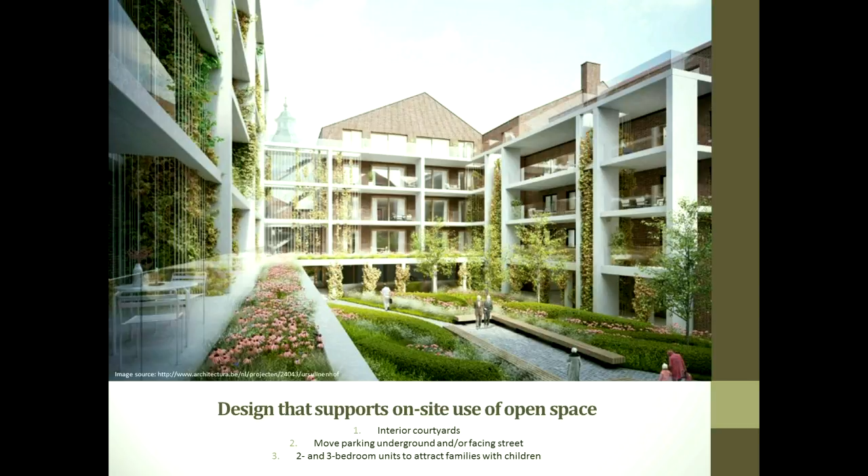But if we're going to say that the reason we want to allow more density in this neighborhood is so that people will use the LRT and connect with active transport to uptown, we should be building the facilities to actually facilitate that, right? Explicit cycling lanes.

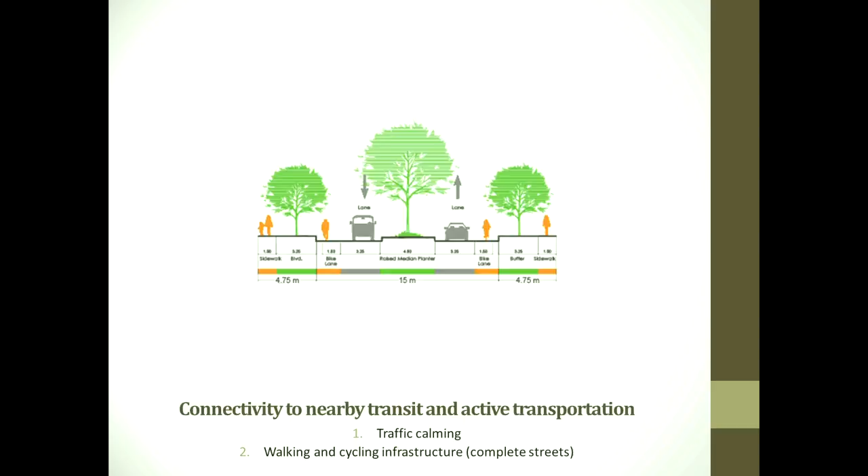What about the path to the LRT? I think that's a great idea. That's going to actually probably be the main connector from that neighborhood by the site to that LRT stop by the Grand River Hospital.

I'd like us to think more about how it will be maintained in the winter. Will it be wide enough to accommodate pedestrians and cyclists? Will there be lighting for nighttime, when people are returning off the LRT and going through parts of the cemetery, and then cutting through, hopefully, what will be a community trail?

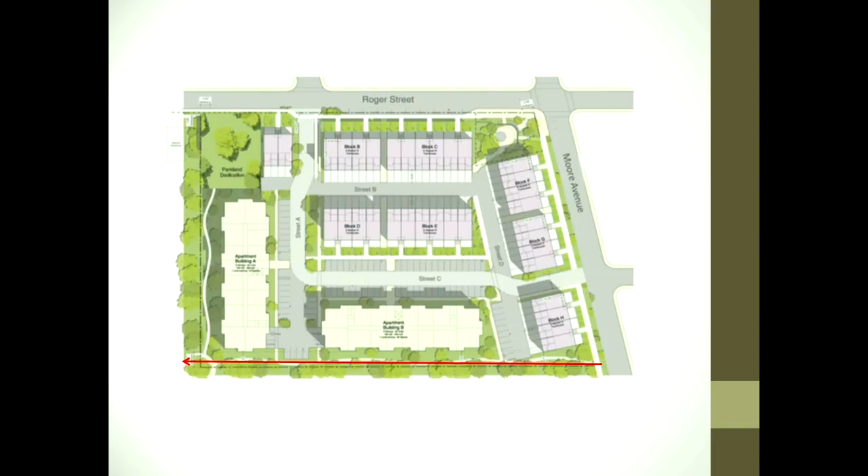Why not at minimum suggest traffic calming in the immediate vicinity of the site to ease the concerns of neighbors about how fast these cars will be going, when many of their kids will be walking to the school just down the road? Yes, we can think about this as a minor collector, but on a day-to-day basis this is a way to school, a way to go to the grocery store, a way to ride your bike to the park, to connect to the spur line where that first arrow ends.

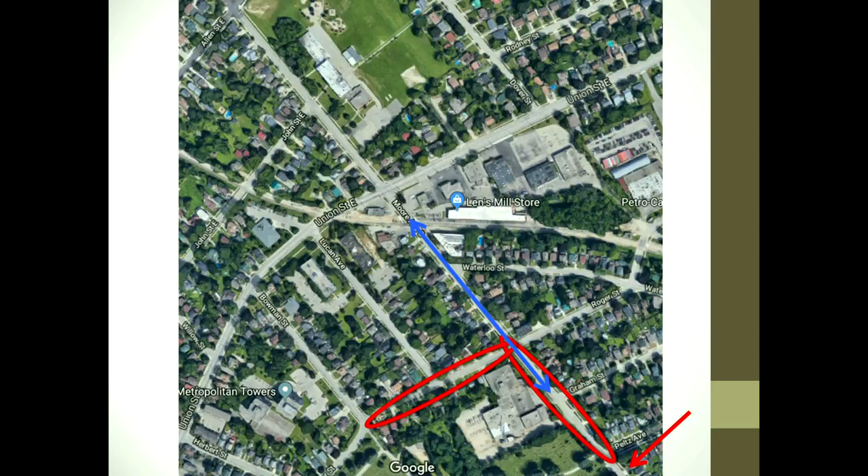So how will we actually use this development as an opportunity for community benefits in this broader sense? I ask you to consider that off-site issues are not considered separate from the new development.

Council could set a standard for what developers need to provide in neighborhoods if they want more density in existing low-density areas. The development is indeed on private property, but impacts of the design have public impact on the surrounding areas. I think Council needs to ask for strong designs that will allow future residents to live active, transit-oriented lifestyles and make their home locally so they don't need to drive to the park or school or just play with their kids outside. And I say that not to be anti-car, but because the LRT and growth management and all these tools are actually being used as the very justification for permitting more density.

So I recommend that Council in some form require traffic calming on Moore and Roger, or Roger and Moore, that's the James Bond intersection as I like to call it, as part of the project to reduce speed on local streets. Council should put forward site design guideline requirements to move most parking underground, to support site design that creates actual usable open space for the future residents.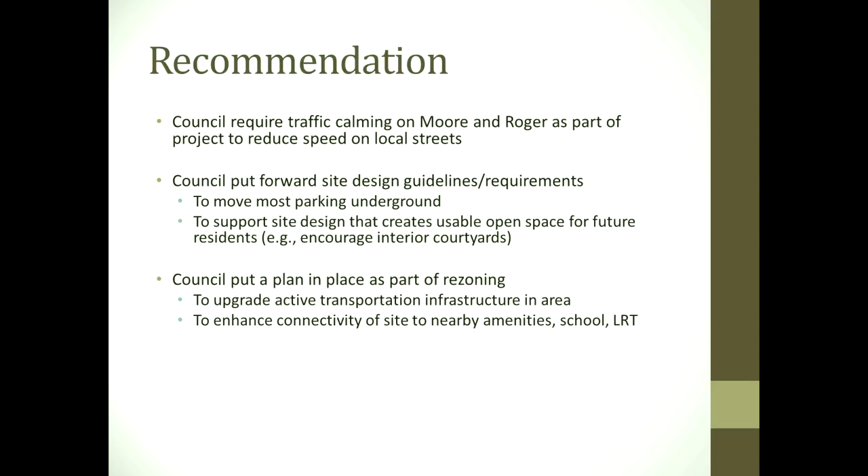For instance, interior courtyards are one option being explored in many places and have a track record for doing that. Council should also put in place a plan as part of the rezoning to upgrade active transportation infrastructure in the area, to enhance connectivity of the site to nearby amenities, school, LRT, because that, again, is the justification for supposedly allowing the density in the first place.

But I also think we can revisit the appropriate density and the design on the site. Medium density is probably appropriate, but my assessment would be that it could probably actually support a bit more density than what I'm currently seeing proposed by the developer and by the city. I'm reminded of what Brent Toderian, former chief planner of the city of Vancouver and now globally known planning consultant, says about density.

He says it's not about density, it's about density done well, right? It's about how you design this density, and I think the developers have come a far way in this case to work with the residents to change the look of the density, but it's also about how the density is situated and contextualized in the neighborhood.

One of my colleagues, Pierre Filion, likes to talk about the tower in the park model, right? You put high-rise — in this case not a high-rise — but you add more density into parks so that people can enjoy them. He says all too often this model turns into density or high-rise tower in the parking lot. What I'm seeing here is not a high-rise tower, but I'm certainly seeing density surrounded by parking. Is that truly in line with the visions put forth by the documents that are being referenced to justify this development? Thank you very much for your time.

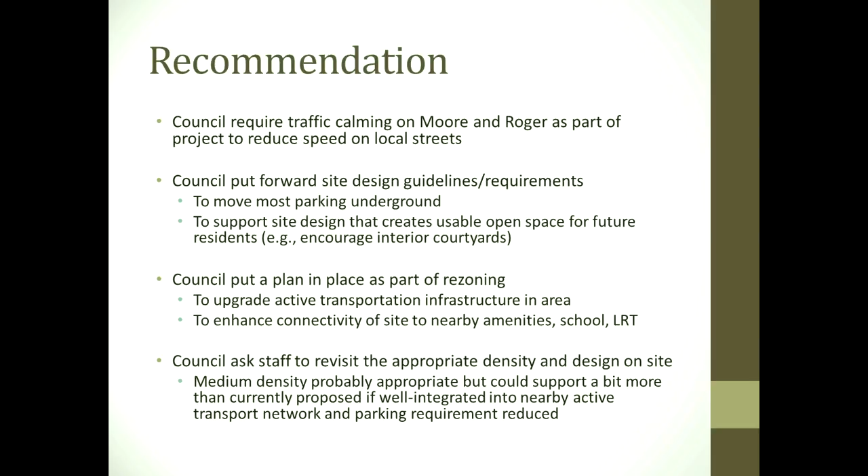I appreciate it. Thank you very much.

Well, thank you, Marcus. That's like a free 8-minute TED Talk there, so thank you very much for that. Got our money's worth there. Questions for Marcus at this time? That's it. Thank you very much.

Yeah, thank you. And Councillor Henry. Thank you, Mayor. I'm wondering, following on the conversation around various policy tools and suggesting connections beyond just a Planning Act decision to broader decisions, do we have a sense of whether our general official plan policies in this regard are supportive and connected in thinking about linking these kinds of things at this time, or is that an upgrade that is something we could consider in the future as part of another process to more explicitly link this as something we can consider in this kind of density change?

Go ahead. Through Mayor Jaworsky to Councillor Henry. Perhaps the best approach to deal with some of the suggestions the delegation had mentioned is the transportation master plan. Not the region's, but the City of Waterloo will be undertaking a new transportation master plan, which should be looking at all modes of transportation, active modes, right-of-way standards, widths, all of those things, and that might be the best avenue to look at those type of options. And that can then lead to ultimately further zoning changes in the comprehensive bylaw. Not necessarily the next iteration, but we can do some fine tuning as a result of that transportation master plan.

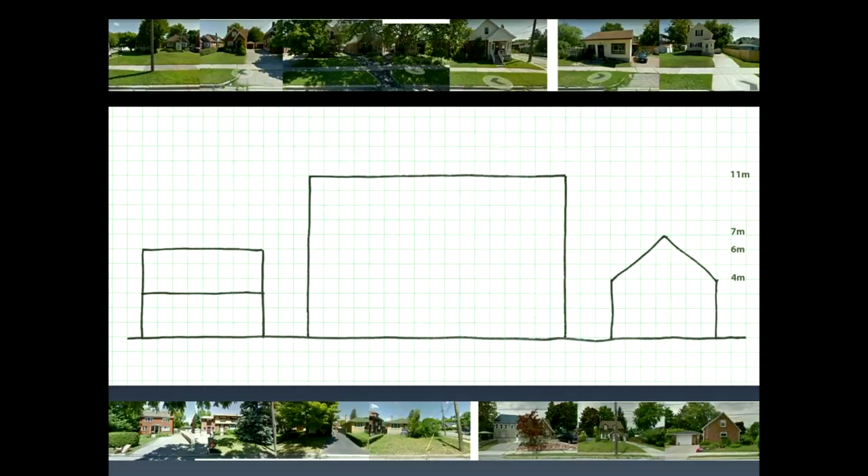The top row and the bottom row are actually Google's streetscape views of Roger Street and Moore Avenue that would be facing the development, just to give you a sense of how much space there is there.

My third point has to do with a curious feature of the split zoning, the GR1 and the MR6. The applicant is asking that the south and west sides of the property be zoned MR6 so that 6-story apartment blocks may be built. They are not asking that the core of the property be zoned MR6.

They've not submitted concept plans with a high-rise building in the core. There was just a suggestion that that could happen. Nor has the city at any time suggested increased density here. Yet the recommendation is to zone this area as MR6.

Given that the recommended restrictions on zoning will allow up to 250 units per hectare, and the concept designs as submitted are 6 or 8 units shy of this depending on the model, final design could add a 3rd apartment building in this central area and still be within the target of 250 units per hectare if the other structures have minor modifications. If this is not a scenario the city approves, this zoning should be reduced.

The large area on the left at the bottom is the medium density zoning, and yet that middle area, which I've redrawn as the low density or lower height allowance, would fit actually everyone's proposed plans and would close the door on something unexpected happening there.

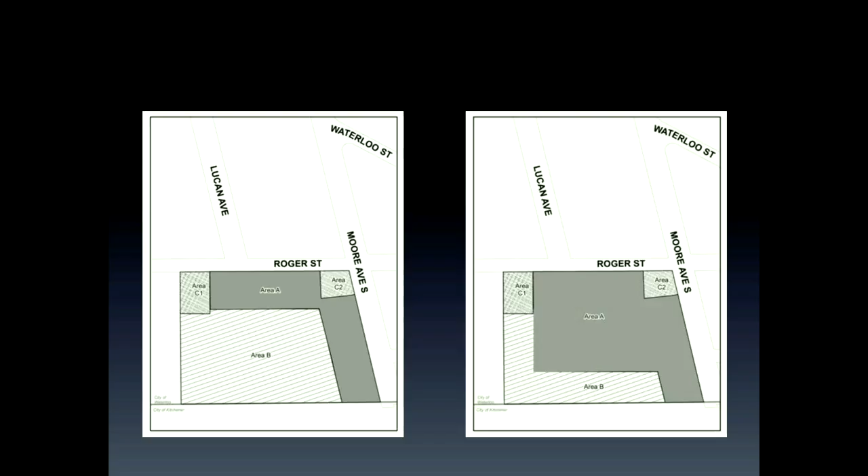And I too would like to thank Wendy for this report. I am by no means a city planner, but I do think I have some expertise to share here because I live on Roger Street and I have children. And one of the big questions here, I think, is what to do with parks.

So what I'd like to do is, I'll draw your attention to the second one there especially. There's been mention of parkland dedication, but I did not find that in this report. What I found in the report was a commitment to 1 hectare of parkland per 1,000 residents. And so I'd like to talk about that this evening.

I'd like to describe why the proposed park space on the northwest corner of the subject property is profoundly inadequate, and that based on the City of Waterloo's own description of the purpose of parks, its policy, and the official city plan, much greater priority should be given to parkland than the current plan reflects. Incidentally, I didn't hear about this meeting till about 5 days ago, so I've given the whole text but didn't have time to send it.

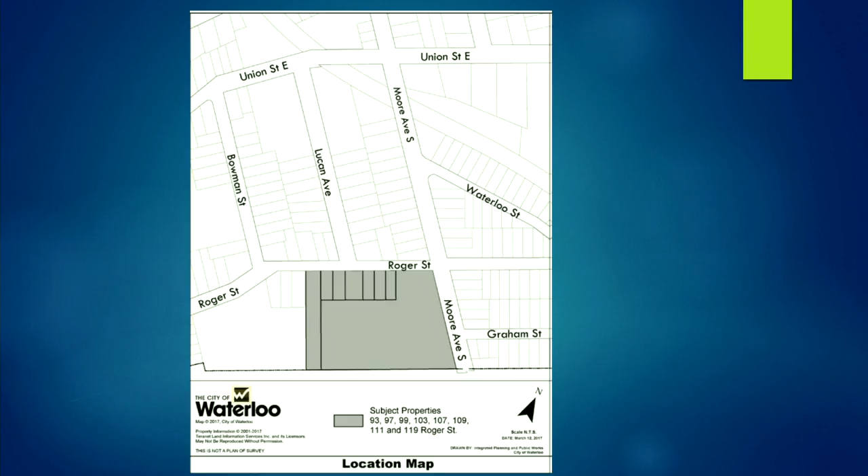Secondly, it's bounded on the south by Mount Hope Cemetery. I was here for an earlier meeting, and the developer of the property suggested that more green space was not necessary, basically because, paraphrasing, the cemetery could function as green space. This is not the case. I have children, we live near this cemetery, and it is not a park, and I'll give you some reasons why.

First, this is not a play area. Our children have been confronted and scolded on many occasions, told that it's not to be played in, they're being too loud, it's disrespectful to throw a ball. This is a culturally and religiously sensitive area. There are families visiting grave sites. This is not multi-use, and neither is the Northwest or Northeastern Park. If anybody has children and a ball runs out onto Moore Street, that is not functional.

And it's in Kitchener anyway. In any case, it's a great place for a walk. This is a great place for seniors, they love the cemetery, but this is not a place for children to play.

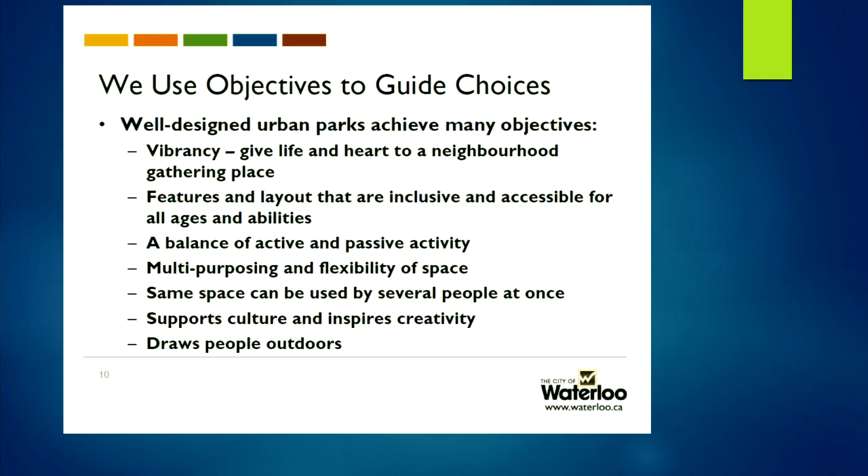If you look at this, notice how this is a multiple use of space. This isn't a park that's beside a major artery in the city. This is big enough to have a skating rink. We were asking before, can a skating rink fit in the corner? It doesn't matter because the puck is going to go in the road. It doesn't matter if it can fit it. Anyway, you can tell I'm a bit passionate about this.

I encourage you to look at this—it's all drawn from the Mary Allen Park PowerPoint presentation, which is available online. It has a wonderful description of the purpose of parks. Neither of the parks that are proposed would fulfill those uses because they're too small.

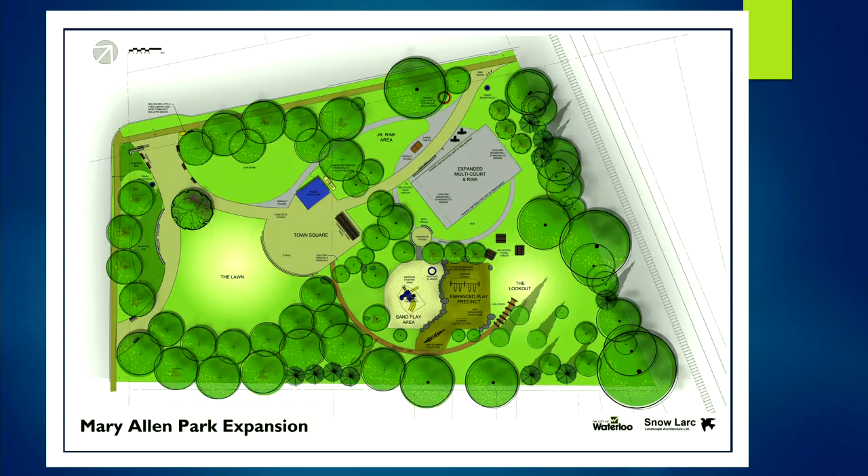Currently, and incidentally, Mary Allen Park is the closest one, as I said. It's currently serving a local population of over 1,000, which means it's already full. It's on the other side of Union, as I said, and it's in a lower density neighborhood than ours, and yet that's the one that's gotten expanded.

I wish, and again, I'm not against the expansion of Mary Allen. I'm saying let's live up to our commitment. If that is going to be the model, then let's make it a model.

Alexandra Park—I'm not going to spend any time on this, other than to say it's too small. The city council has recognized it's too small, and you're buying properties around it to expand it. You already did. This is exactly what's going to happen in our area: you're going to build a park that's already too small before it's even built. If you superimpose a baseball diamond on the park, it's not big enough to hold one.

So here's the proposal. We've already heard about this. What I'd like to do is show you some numbers. Again, 1,000 residents per 1 hectare, approximately. And incidentally, based on the current population and based on city policy, it would seem like half of this should already be a park before anything happens here, based on that policy.

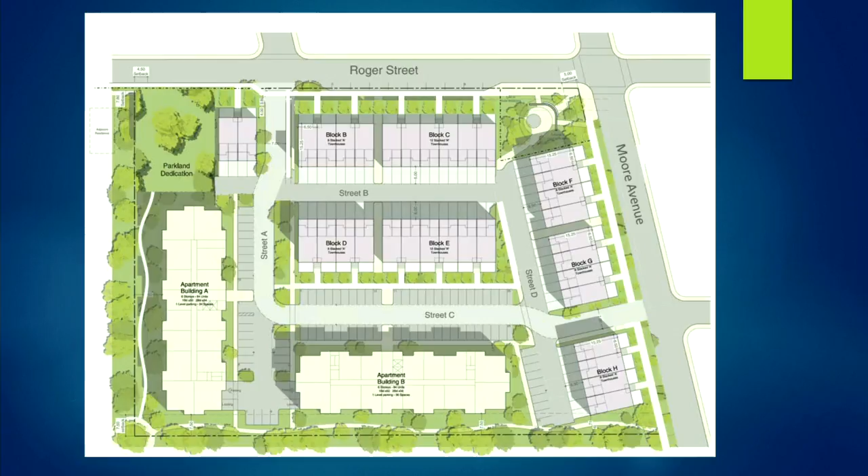Imagine this space with all of the stacked townhouses around the sides and a park in the middle, where you'd have something that would actually welcome the community into a park, and not into a whole bunch of interior buildings. And I already mentioned that.

So, to conclude, I am not against intensification. This is not a rail against intensification. As I said, intensification is already happening. I support intensification in my neighborhood. This has begun and it will continue, and it will increase—it will be faster in the future. The basic question is not whether housing density will intensify, but whether it belongs on this property, and I don't think it does.

Again, if you look at these two, which one do you think comes from a higher density neighborhood—the park on the upper left or the park on the right? I live in the neighborhood on the left.

As Waterloo has recognized, development does not just mean buildings. Access to local parks represents a very significant aspect of a thriving, vibrant city. Our city has created an official plan that strategically locates intensification and has enshrined the importance of parkland in policy by providing a concrete target.

I am also inspired by the city's decision to point to Mary Allen as a template, especially a template for population density in the city. This is exactly what's happening in my neighborhood. The subject property certainly has incredible potential to follow that lead, and I've got a whole description of what that park might look like in here.

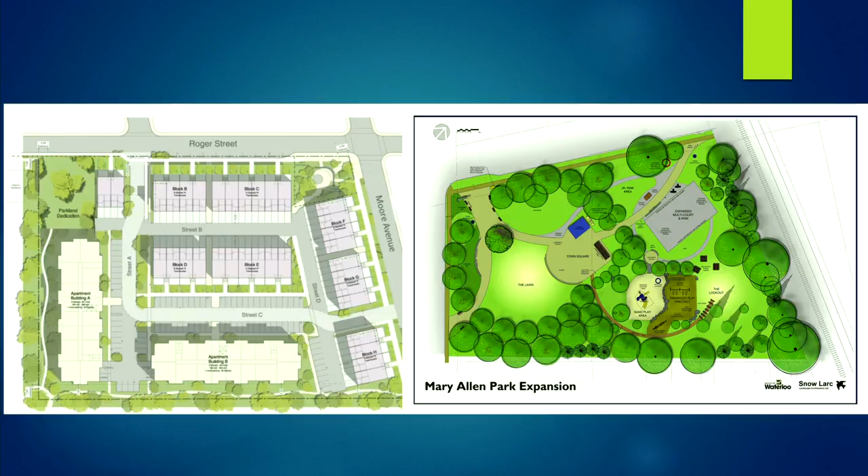Finally, back to this. In 20, 30, 50 years from now, when Union Street is lined with apartment buildings, what would we rather have on this particular property that's a block off the main road? Another crowded housing development with a token playground and a tree, maybe a swing set, or a vibrant park that serves as a community hub and recreation site for thousands of people within a few blocks who have no yard of their own? I trust that City Council will support its vision of a vibrant community by following its local parks policy, an official city plan with respect to this property.

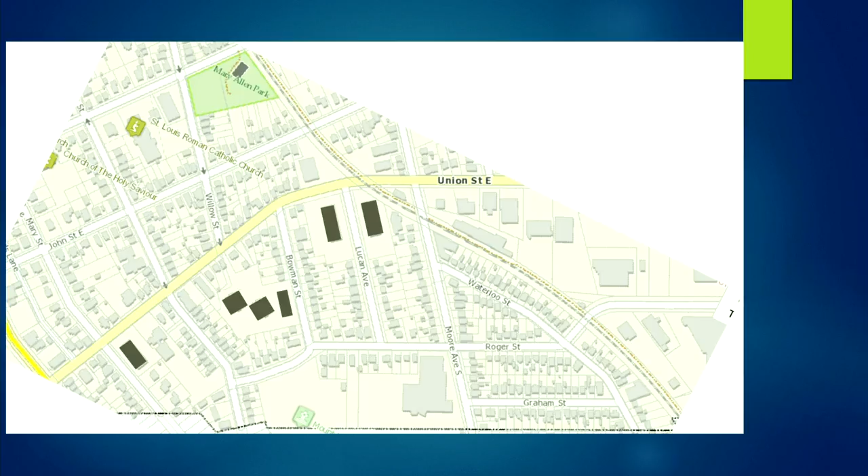Thank you very much. Just as a point of correction, there is no parkland in lieu, I believe, in this case. In the earlier presentation, for example, from the tall building that's going on Regina Street, there would be parkland in lieu on that one, as an example. But the intention here is to get what is required on this development site, which is the size that you see in the application. There's really only two options to go with one way or the other. Okay, so that's what we're attempting to do here.

And in the case of our official plan, the reason for having the need for parks in totally redeveloped areas is because of years gone by, 75 years ago, there was no case for parks in developments like this, which is unfortunately why you don't particularly have one there. So, unfortunately. Which is my point. This is the opportunity to have it. In our case, the land has to be for sale and available to us at a rate we can buy, and I'm guessing that's probably not the case because it's industrial property.

But questions for the delegate? Seeing none, thank you. Thank you.